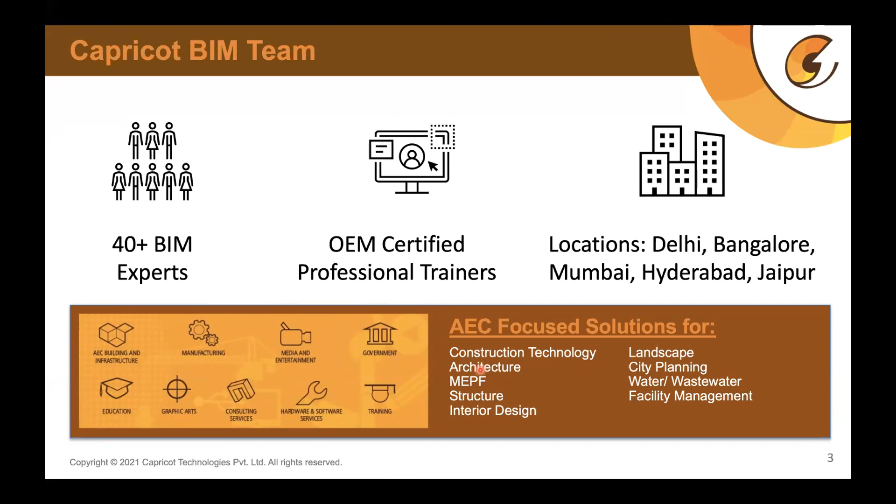Apart from our training services, we have a dedicated support team, not only towards IT support, like software support, but also around your functional and technical requirements of your software. So anytime you are stuck with using any Autodesk software or other software, you can contact us through various modes: phone, web support, live chat, or drop in an email anytime, and we would be there to support you.

Moving more specific to the BIM enablement programs that we are doing for professionals and organizations like yourself. So first, why are our programs different from others? We have been doing training programs, you can say, for the last 30 years now.

And we have realized that at the core of all these programs lies people, people like yourself. Even in an organization, it's the people who are actually doing work on these tools or these platforms. So in our program, what we have done is put people first at the core of the program.

So if he is an architect, the program is specifically designed around that person; or the designer, the program is more around that. If the person is a civil engineer, he will be trained more according to his profile. Then a construction person might be having different requirements, etc.

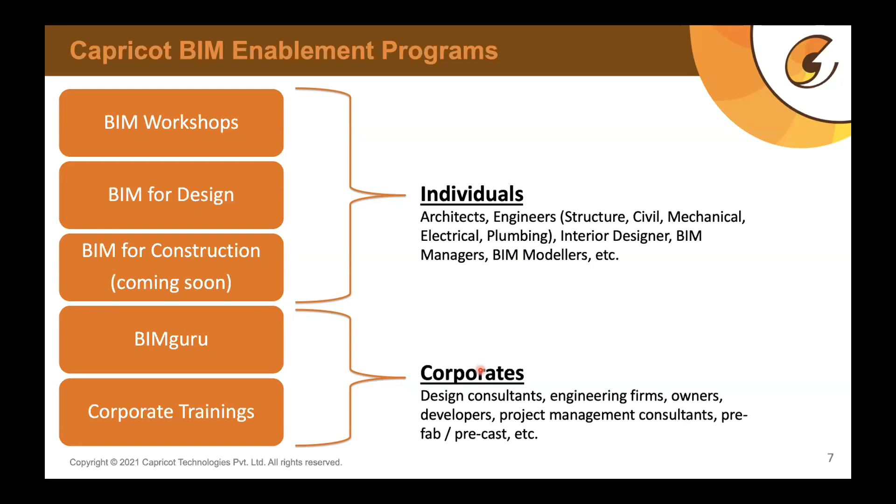First, coming to BIM workshops, like the one you are attending today. These are very limited time, like 2 to 4 hour programs, highly focused on 1 or 2 topics to address current market requirements. We keep researching what is happening in the market, what people are looking for, and run these highly specialized topic-level programs. This serves two purposes: one, it enables you to gauge the capabilities of that solution the workshop is on; and second, it at least starts you on a path so you can start using that software if you already have it, and utilize it much better.

The second one, which is our main program for individuals, is BIM for design. This is an extended program that we run for 120 hours. Depending on whether it's a weekend or weekday batch, it can last from 8 to 12 weeks. This BIM for design program is completely aligned with an engineer's or architect's or BIM modeler's or BIM manager's work role, and we follow the workflow of what they do in a normal project or day-to-day life. All the tools are aligned to the steps.

So we are not doing a tool-based training over here - we are very clear about that. We are not only teaching you how Revit works or how Navisworks works or any other function works. It's more about, if you need a certain output, what are the steps involved to do that? So tomorrow, after completing this BIM for design course, you can go to any organization in the world and say, I can do it. You don't have to say you'll think about it or try it out - you can just say, yes, this is the output required and I can deliver on that.

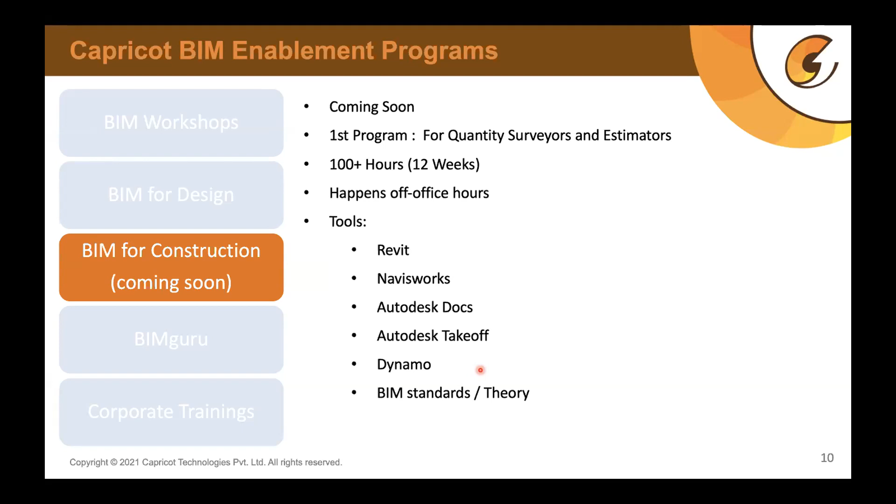So the three individual programs that we run are BIM workshops, BIM for design, and BIM for construction. Next, more oriented towards corporates, is BIMguru.

This is a program that we run on an annual subscription with organizations, where the focus is primarily on how we increase technology adoption in your organization. We develop the talent, which could also mean hiring the right talent, and help you in that. Secondly, how do we upskill your current level of BIM usage in your organization. And of course, we support you in resolving your IT issues and issues related to BIM. This is an annual subscription kind of program.

As a part of this, we also give you a lot of content. It can be Revit families, Revit content. And especially in India, you have a lot of India-specific templates required for different domains. Engineering might have different templates required to use a software, architects might have different requirements. So for that we have different templates. We give you a lot of content as a part of this program to your organization, so that will make your usage of software very fast.

And of course, we run a lot of corporate trainings. We do a lot of customized trainings for our customers, and these customers are not restricted by size or the type of projects they do. But when they have a vision that they want to move to a BIM platform and do their projects on BIM, that is where we come in and help them on strategy and planning of how BIM will be implemented in their organization. How do you optimize people, how do you optimize the right technology, which skill set is required to deliver these projects in the right manner. So we do a lot of customized trainings for these kind of organizations.

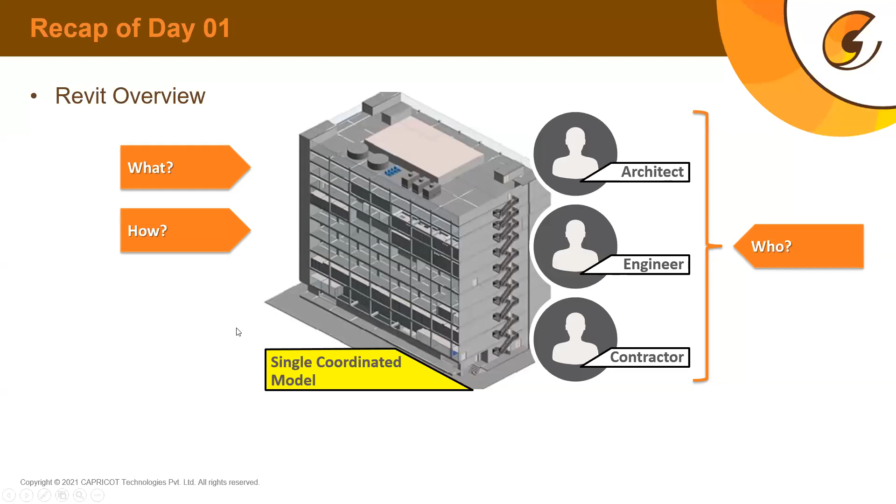When can we use this? We can use the same software from the inception of a project to the operation stage of that project. Then we discussed Revit advantages yesterday - there are a few more advantages we already know, that it creates a single coordinated model, and the model is in respect of a project, but for the software, it's a database.

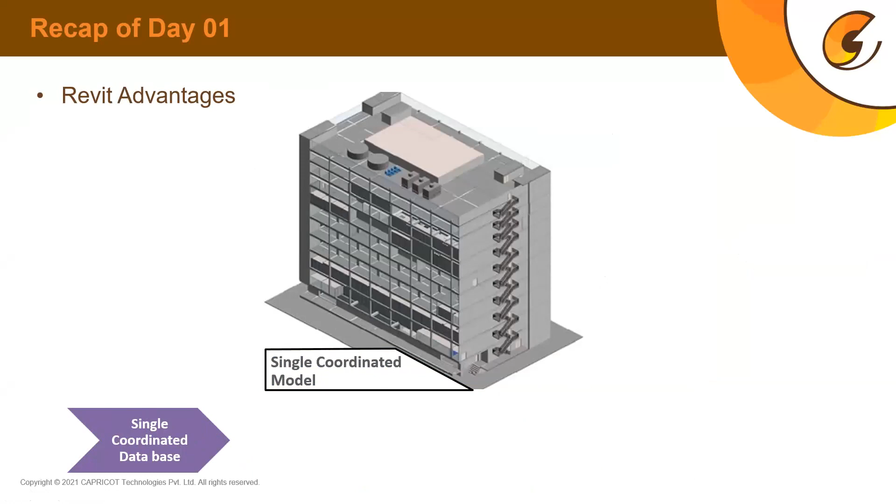So we have a single coordinated database in this case, and we can collect all databases together, like what we got from different consultants or stakeholders, and run different clashes on it. After coordination, when clashes are identified, we can assign those clashes to a particular domain person, and changes will be made automatically. So whatever changes are made in the central model will be updated throughout the domain. Change management is automated in this case.

Then it automatically updates, like we already discussed, 3D and 2D connected views. So the documentation process is actually enhanced in this case. You need not manually update every drawing, section, plan or elevation separately. You just need to focus on design, and the related views will automatically update. In this way, it enhances your 3D views output and 2D documentation as well.

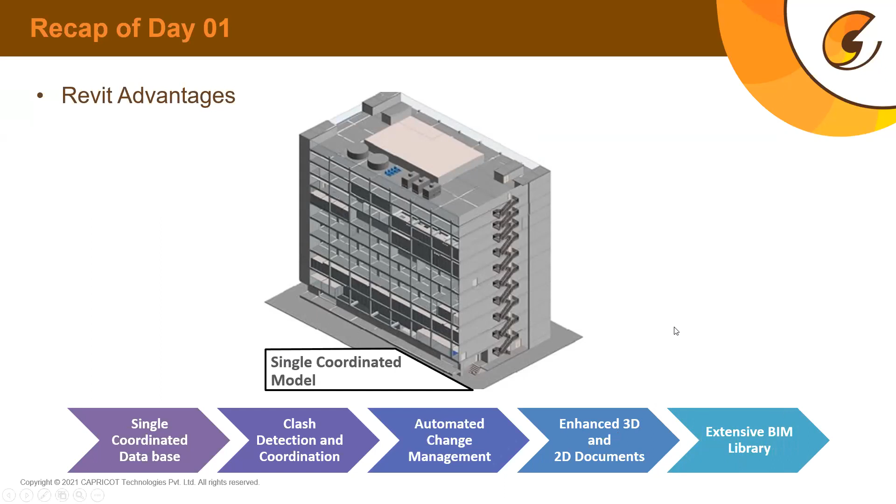But for that, we need to use especially BIM library. It has extensive support of BIM library, which we discussed a bit in detail yesterday as well. I'll just briefly go through that part again. So now we'll discuss about BIM library specifically.

In order to get accurate quantities, because this workshop is actually dependent on the quantification part of Revit, we need to also understand how Revit families work. Primarily, Revit has three types of families: loadable, system families, and in-place families.

We discussed in detail yesterday that loadable families are similar to blocks in AutoCAD, that you can save those families with all its parameters as a separate file and load it into multiple projects. But when we do multiple projects, we need to, according to the design requirement and specification of the project, create walls, floors, roofs, and staircases.

These are all customized according to the project requirement. That is why these types of families fall under system families.

Then there might be a specific requirement for a particular situation. Like yesterday, I gave an example that if I have a column and I need to wrap a table around that column, and then, for example, the column size changes, then the table wrapped around the column will automatically get updated, will get affected in that case. So here we are actually creating a relation between two families. In that case, it's a unique situation, and situations like these can be handled by using in-place families that we discussed yesterday.

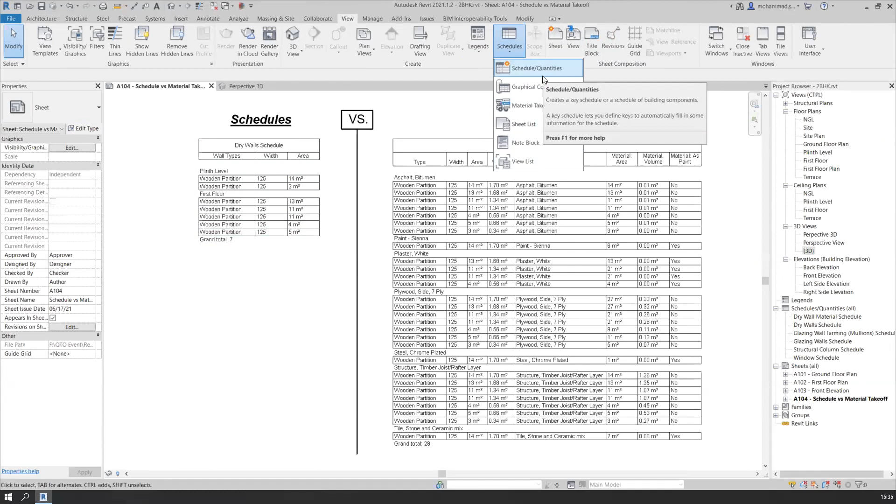For example, I want to count how many wooden partitions are used in my project, then it gives me 7 wooden partitions. But in this schedule and quantities option, I cannot get information about the sub-component of that family. For example, if I need the material specification of each layer applied in a wooden partition or any family, I need to use material takeoff.

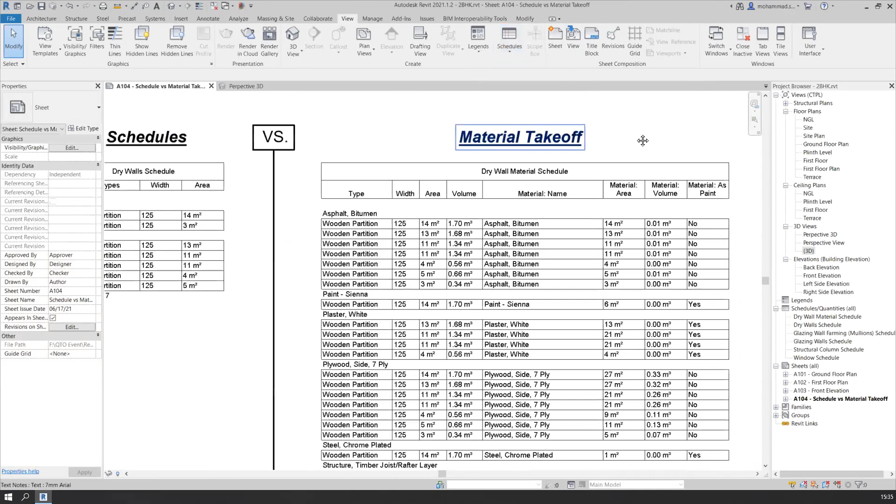We did that yesterday, so this is actually the comparison between schedules and material takeoff. As you can notice, for 7 families, I have used 28 materials. So in this schedule on the right side, it's about the same drywall family we discussed yesterday, and we are getting 28 entries here.

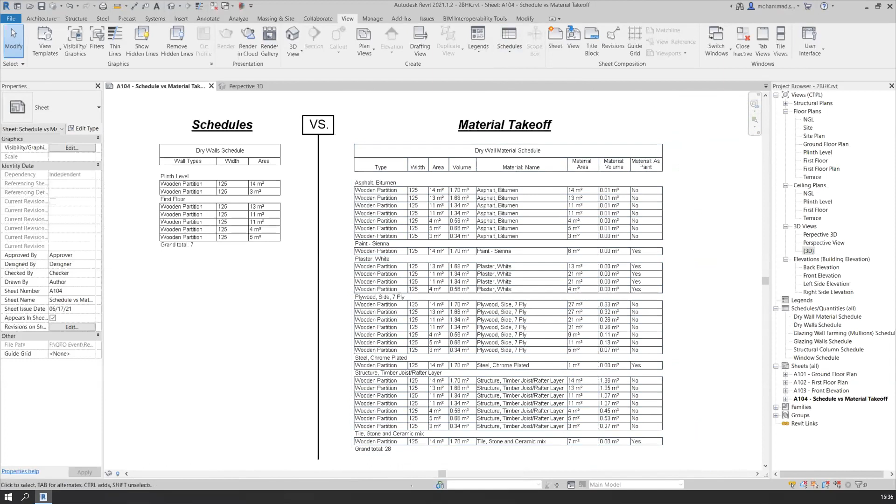At this point we actually wrapped up yesterday's session. We also discussed sorting and grouping, how we can group our families on the basis of, in this case, floors, and in this case, on the basis of material. We also discussed if we can filter out other components which we do not want to see in our schedule, on the basis of certain properties.

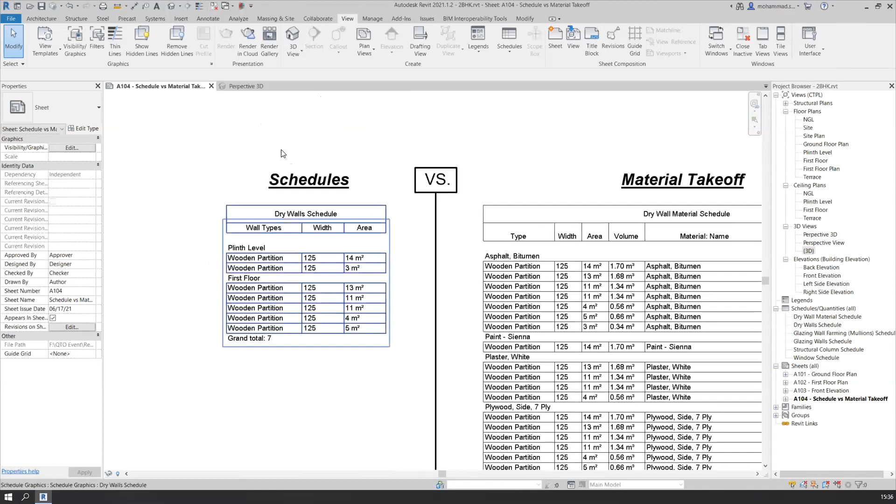So this was the project we worked on yesterday, and it's an ongoing project. It's a residential type project. Today I'll quickly recap the part where we create a schedule, by creating a door schedule.

So I'm going for door schedule by going to schedule and quantities, because I need to count the number of doors. I do not want to get all specifications like volume or area of the door, I just want to count the number of doors, the number of components in this case. So I'm going for schedule and quantities.

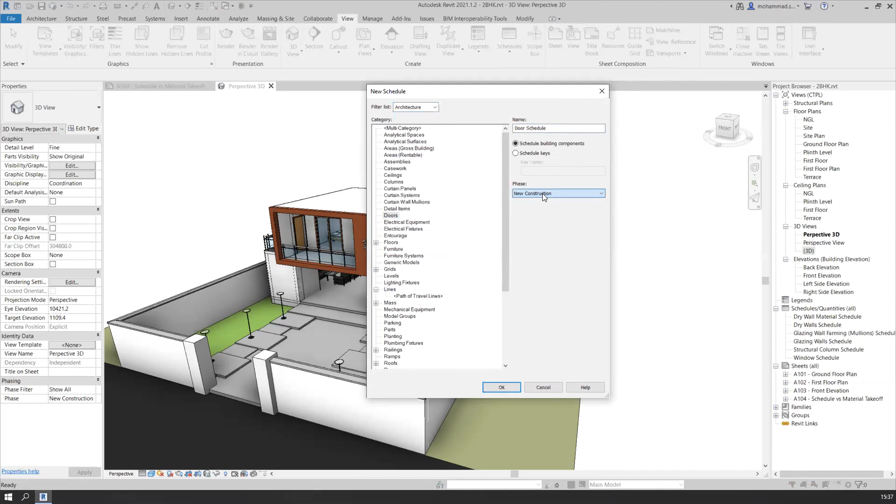I'm opening the door schedule in this case, and we got properties related to doors only, for example the type of door I want to use. So maybe I'll start with type mark, since each door is provided with a mark. Then I'll show you that in the drawing as well. Then we'll take family of the door, then width of the door and height of the door, these specifications.

After that, I'll today also add cost of the door. Yesterday we didn't discuss cost; today we'll also discuss how cost can be incorporated in our schedule. I'll open it, and this would be a preliminary cost only pertaining to material or the component. For including machine and man cost, we need to additionally add parameters. I'll also discuss that.

In this case, as you can notice, doors have marks, like D1, D2 — I'll scroll and zoom in. By these marks, I can identify these doors in my drawing as well.

Yesterday I also showed you the drawings. For example, on my ground floor, I have this drawing, and in it I have doors. This one is D1, every door is marked. Similarly this window is W2, D2 is this toilet door, and this other toilet door is also given D2. So these are marks which are already applied to these door families.

Based on that, we have got this schedule, and I just want to again revise the sorting and grouping part. We go to the properties of the schedule, and go for the sorting grouping option.

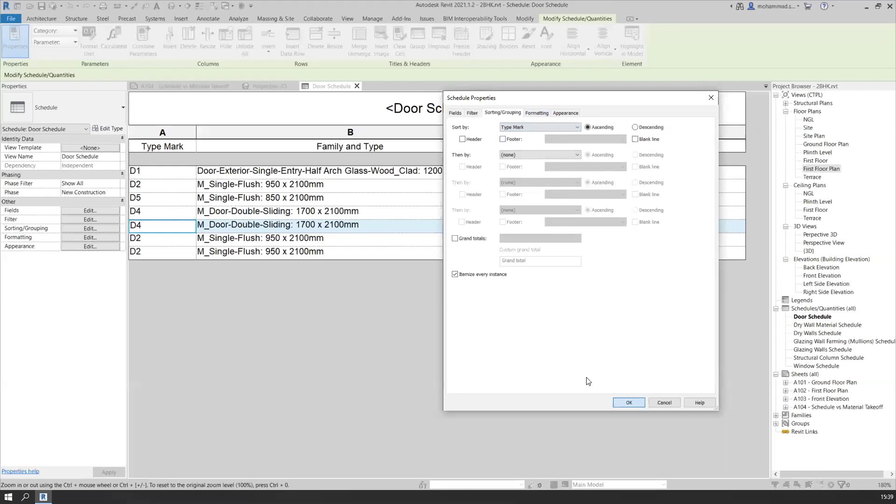And then I'll sort them by type mark. So these are now sorted according to type mark. I just also want to know on which floor these doors are placed. I can now add another field, and that is by the name level of the door.

So we can also add on which floor these doors are placed. Yesterday we also discussed this, how do we add a level. Then we want to group them, for example doors which are on ground floor as a separate group, and doors which are on first floor as a separate group. I'll again go for sorting and grouping, first I'll group them by level, and then by type mark.

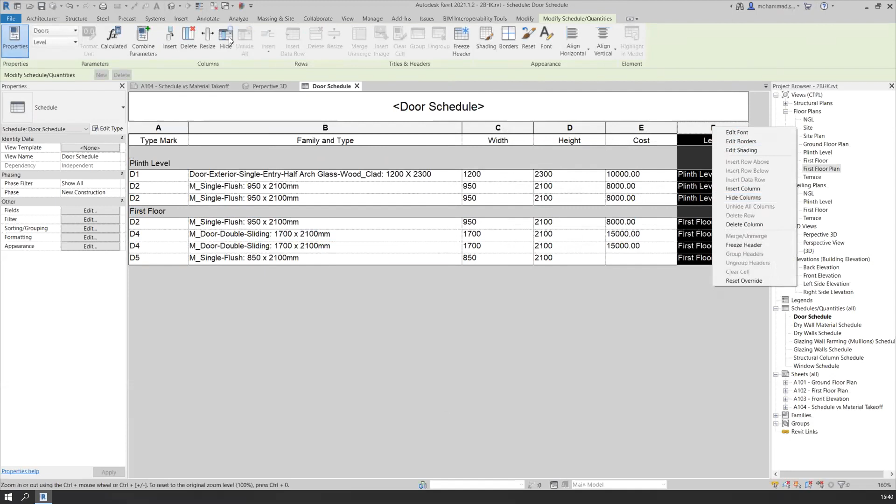And I'll also add header for level, and two groups I've got here. I think I do not require this level anymore, so I'll just simply hide this column. So we have option for hide here and under our modify tab as well. This we have gone through yesterday.

Now, since I've added costs in this case, when you create a family or place a family inside a project, or any component inside a project, for example on my ground floor, if I was adding this particular door, I can go to the properties of the door to modify it. I think most of you know who uses Revit here. And we can also add cost in this case.

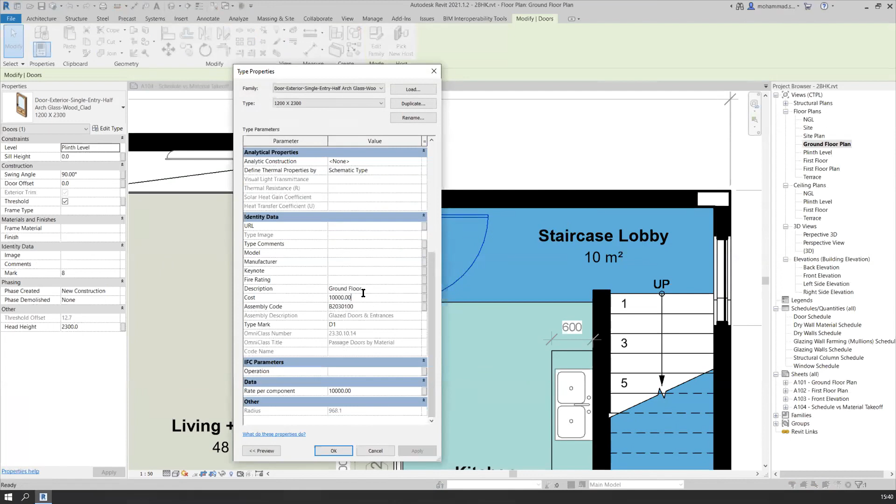So whatever cost we add here in the properties of the family will be automatically updated inside the door schedule as well, as you can notice in this case. So this last column is about cost. For this particular door, we have not added cost.

Yesterday we also discussed, if I need to identify that particular door, that particular element in our project, we can go for highlighting that element in our model. So I'll click on highlight in model, and it opens a view for us. I'll just go for another view.

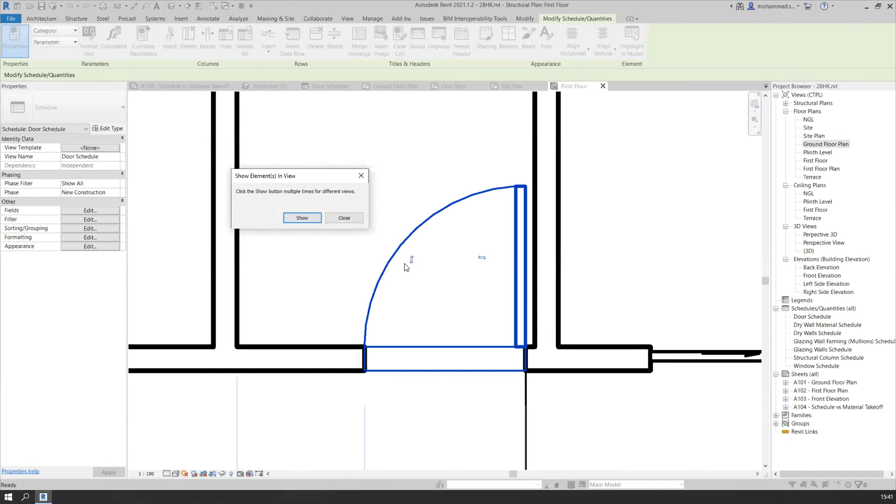This is the site plan, this is first floor. I think this first floor is good. So this door actually is having that entry D5, this door. So you can identify that this door is placed in the toilet, and can discuss with your client and other consultants, and can add cost accordingly.

So either you can add cost here in the properties, or any property you can add inside the properties of the component, or maybe you can just simply go to the schedule again and add cost there, and it will automatically update in that component's properties.

So for example, if I add 12,000 INR for this particular door, and if I get back to the first floor drawing and check the properties of this door, now this door is also updated with the same cost. Whatever cost I change here, for example 13,000 INR, or 13,750 to be very specific, it will automatically update in our schedules as well. So this is how these interrelate.

Now we'll also discuss that we can apply conditional formatting here, like we do in Excel, so that any cost which is more than 12,000 or 10,000, for example, will be highlighted in a particular color in our schedule. That is also possible, so you can add color coding to your schedule according to certain properties.

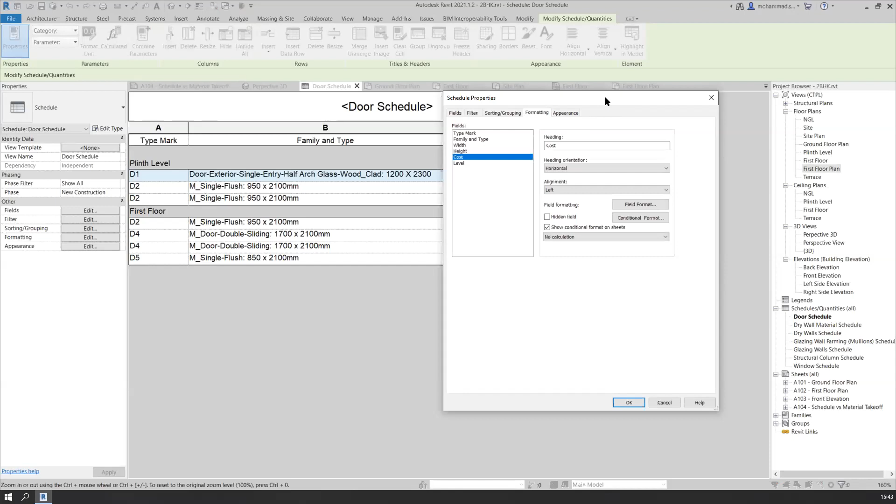For that, you need to go to the formatting option under the properties of schedule. There you select the desired field, like in my case cost, and I want to highlight by certain parameter or condition, so I can go for conditional formatting here. After clicking on conditional formatting, it opens with a set of rules, and you can also define rules. For example, you can define cost between, not between, equal to, not equal to, or greater than - these are certain rules you can apply here.

I'll go for any cost which is greater than 10,000, for example. I'll add the value here, and I'll highlight them by the color - let's say a shade of red.

And once applied, if I accept this condition, any door with a cost more than 10,000 will be automatically highlighted. So in this way, you can also add conditional formatting under the formatting option. I'm not using this conditional formatting for now, so I'll just remove it by clearing this rule from the conditional formatting option.

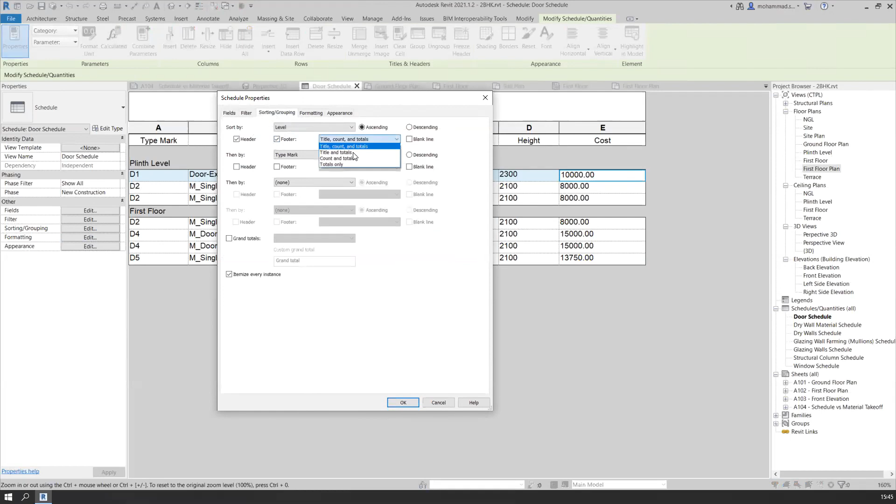Additionally, we can also take the total of this cost parameter, like we discussed yesterday. In order to get totals, you can go to the formatting option and allow cost to calculate totals. Then, after going to the grouping option, you can add a footer, and level-wise you'll get the cost. So level-wise, on the ground floor, 26,000 of cost is needed for applying these doors, and for installing doors on the first floor, I would require 51,750 rupees. You can accordingly add cost.

Additionally, we can also add a grand total for all the calculated values. That is also available under the sorting and grouping option. I'll just check grand total and click OK, and the total number of doors and the total amount of calculated cost will be given.

Later, for example, if your schedule is too large and not easily readable - in my case the schedule isn't that big since I've taken a small project for this example - but if you have a lot of items in your schedule and want to segregate by some visual reference, you can go to the appearance of this schedule.

And add a stripe row function. This function was introduced in Revit 2020. So if you are using any version lesser than Revit 2020, maybe 2019 or earlier, you won't find this option under the appearance tab. After 2020, and the version I'm using is 2021, we'll find this stripe row option.

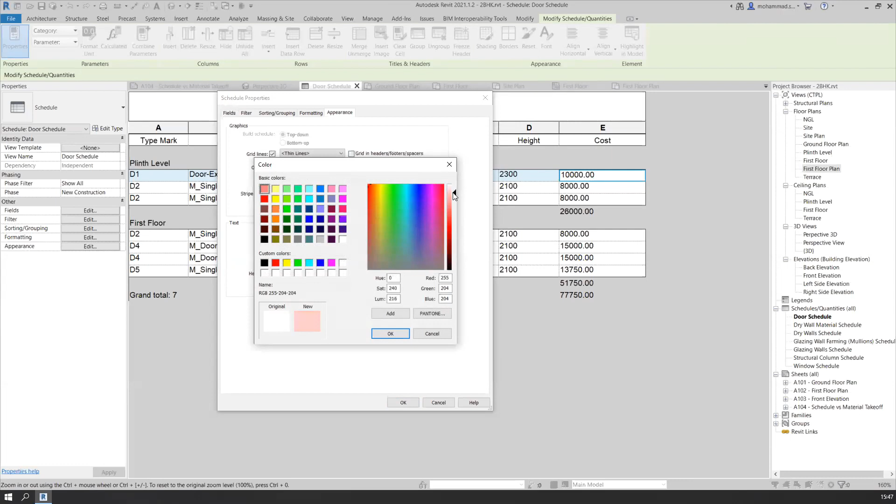Once I apply this, as you can notice, my color schedule is now color coded. Now I've got stripe rows to identify different items.

You can also add this schedule on a sheet for better presentation. For example, I have a ground floor drawing composed on this sheet, and if I want to also add a door schedule along with my drawing, we can drag and drop it onto my sheet. In my case, as you can notice, I do not have any space left on this sheet size, so I can also change the sheet size.

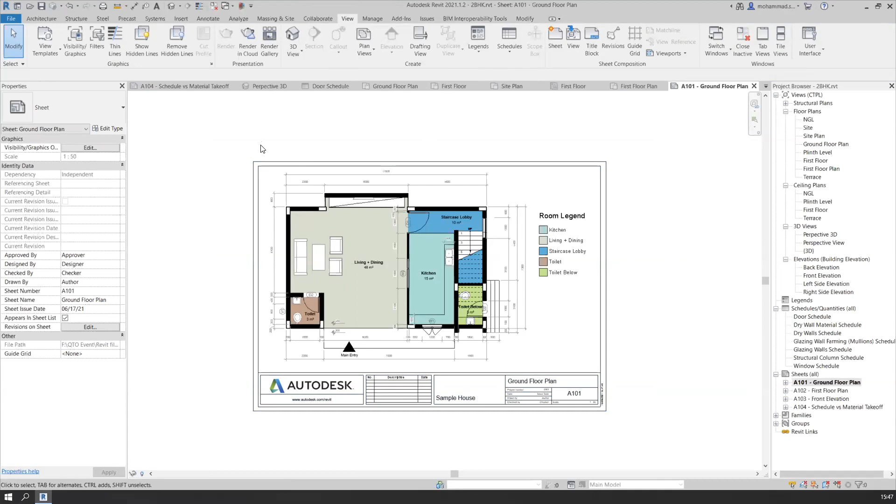Sheets can be added as a loadable family inside your project file. You just need to go to the Insert tab and load your desired title block. Autodesk comes with a bunch of title blocks too - you can go to the Autodesk library and find a folder named title blocks, with sizes ranging from A0 to A4 already available.

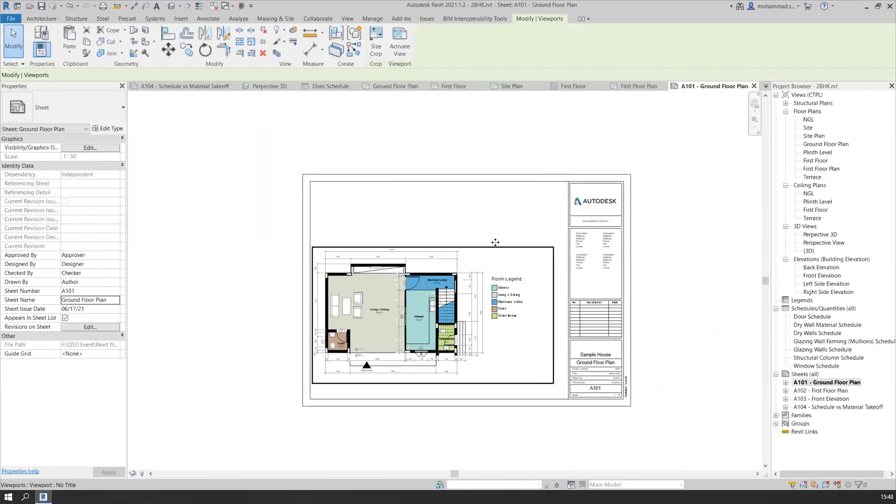In my case, suppose I would like to go with size A2. I'll just open this size, and it will be loaded into my project. I can select the title block family, or in this case sheet format, and simply change it from the properties. I'll change it to A2 size, and this will allow me more space to compose more components on my sheet.

Now, for example, if I need to add a door schedule, I can simply go to the project browser and select the desired schedule from the schedules and quantities group, and drag and drop it onto my sheet.

For example, for some reason if you do not want to see color codes on your screen, and one more thing - the width of these columns needs to be adjusted. You can do that in real time just by selecting this schedule and dragging these control arrows.

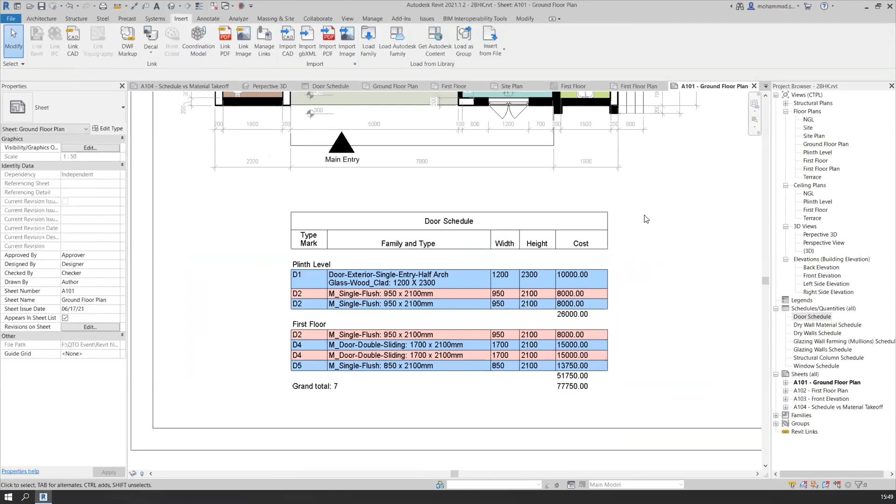Now, in my case, for example, if for some reason I do not want to show these colors on this sheet, or maybe this is a color sheet - for example, I would like to show these colors on this sheet, but for the first floor plan, this plan is actually a working drawing with black and white print, so I would not like to show colors on this particular sheet.

For that, we can again switch the size of the sheet, and drag this door schedule again onto this sheet, and go to the door schedule just by double clicking on the schedule.

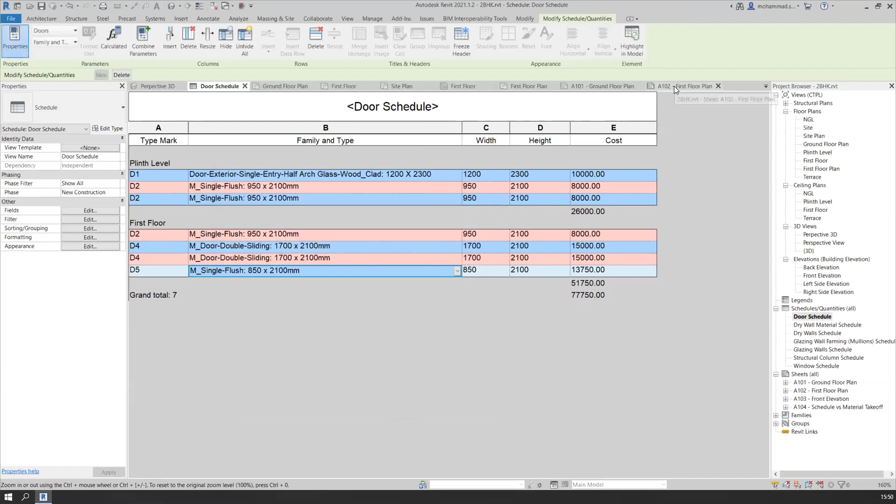I'll get back to that sheet of the first floor, and the colors on this particular sheet are removed. In this way, we can also control the appearance of our schedule.

There is more to appearance, like you can change the height of the title bar, the height of the headers, and the fonts and text. Everything you can explore under the appearance tab. For a detailed overview of these schedule properties, you can contact us separately.

For now, I'll move to another example where I can calculate cost on the basis of some formula. In this case, the cost was lump sum about the component. I can now add formulas according to the volume of a particular component, let's say a concrete wall, and get the quantity of concrete applied in a particular wall.

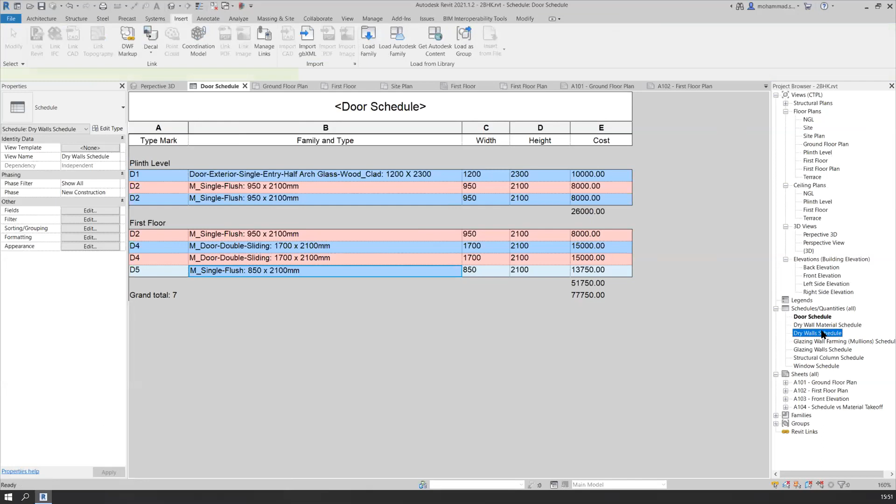For that, yesterday I created a drywall schedule, and as you can notice, I already have this schedule in this case. What I did was apply a filter, and primarily this schedule was of category wall schedule. So I went to the fields, and as you can notice, it shows the wall category. So I have a wall schedule, but it is not showing all the walls because, as you remember from yesterday's session, we applied a filter only to show drywalls.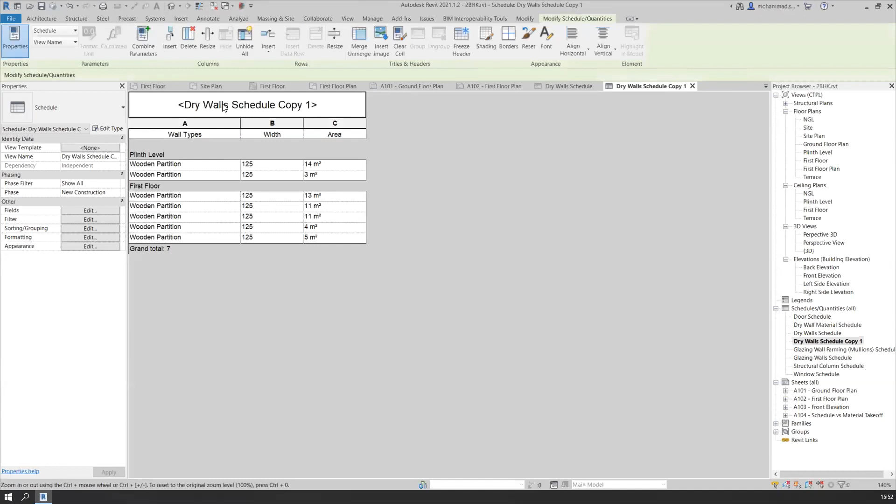What I can do is simply duplicate this schedule by right-clicking on it and creating another copy of the same schedule. In this copied schedule, I can change its name. I'll zoom in and change its name to concrete wall schedule, or maybe quantities.

And I can go to the filter option again, and instead of choosing drywall, I can change it to concrete wall. Now the concrete walls used in my project are highlighted in this schedule.

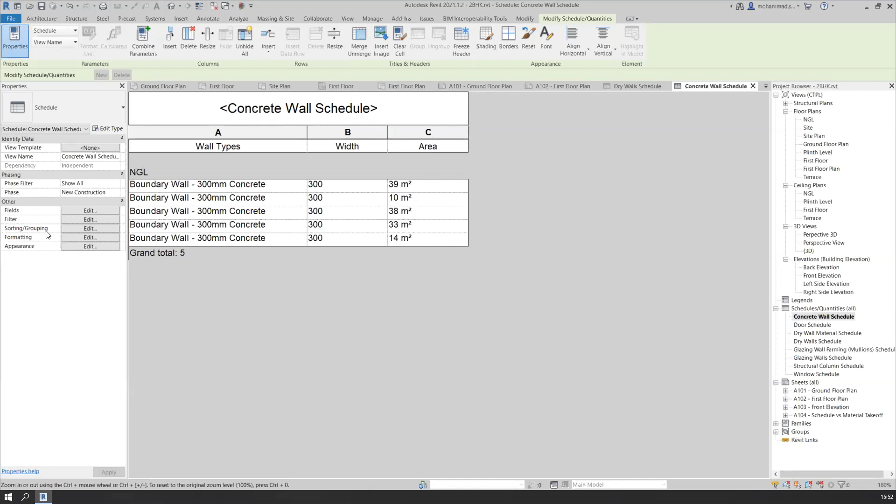Similarly, now I have an area for all the walls. I can also add volume from the list of fields. I'll go to fields again and select the volume option, loading it as a field in this case.

Okay, I've already created this. I'll just delete it and show you how to add a total cost parameter. In this case, I've added volume, and as you can notice, now volumes are also given.

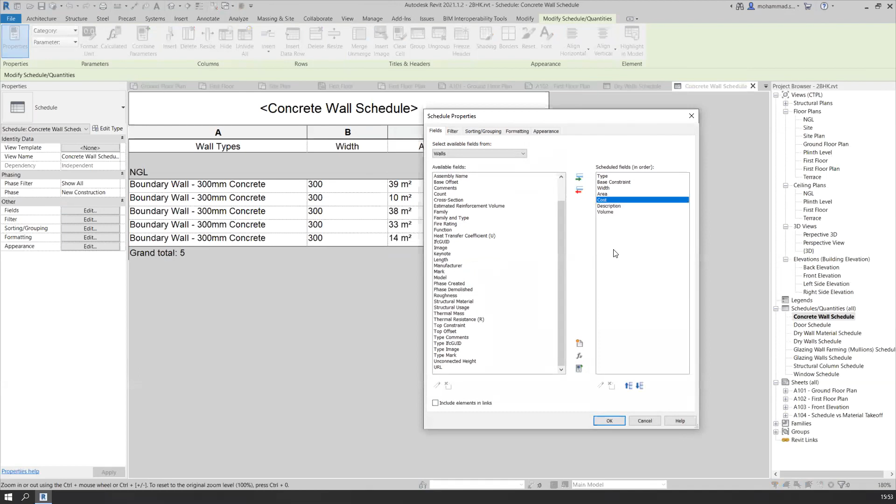Suppose these concrete walls are cast on site, and you need to calculate cost in terms of volume. Then you can go back to fields and add a cost parameter. Okay, I've already added that, but I made it hidden. So anything hidden in your schedule, you can go back to formatting, go to the cost or whichever field is hidden, and make it unhide.

And in this way, rates are already given in this case. If I go back to this particular component, for example, if I highlight this component in the model, as you can notice, this is the boundary wall. I may show it in 3D. I'll just manually go to 3D. These walls are concrete walls, for example.

If I get to its properties, I've already added the parameter for cost. This cost parameter will add only a value of cost, but this parameter by itself cannot allow you to calculate according to its volume. This is just a value you can use as a rate in this case; this is not the total cost of the wall.

So if you want to get quantities in lump sum as a cost of a component, you can use this parameter directly in your schedule, like I used in the door schedule. But for walls and for any component calculated according to area or volume, you can use this cost parameter as a rate.

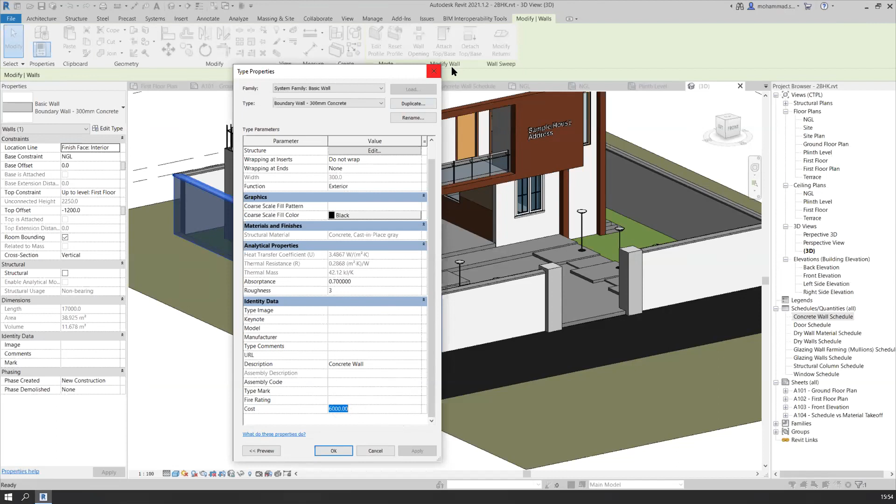That is why in my wall schedule, if I go back to the concrete wall schedule, I already have this parameter used. For example, I'll change it; the original name was cost. I can also change the header to rate per cubic meter, for example.

So primarily, this cost value is not applied to the volume. The actual name of the field, as you can notice if I go back to formatting, is actually cost. The field which appeared after area was named cost. I just renamed it as rate per cubic meter because I'm going to use it as rate per cubic meter.

Now what I can do is multiply rate by volume, and I'll get the total cost of this construction of this wall. In this case, I'm only calculating material cost. If you need to also add man cost or machine cost, you need to create custom parameters, since that is not available by default in Revit.

So you can go back to fields, and I'm just pushing this cost parameter to last, and that is actually rate. This proves that this rate parameter, which I just renamed, is actually the cost parameter available inside the properties of a family. I'll get back to fields again.

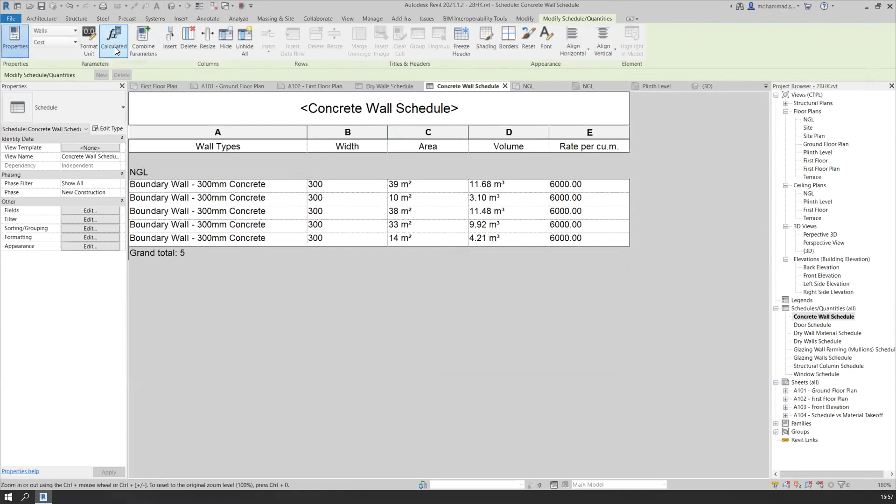So either you find this option here, or you go back to fields and create a calculated field. I'll click on the FX button, which opens calculated fields, and I can name this field, for example, total cost, or maybe total material cost in this case.

Then I can add a formula or percentage also. In this case, I do not require to add percentage, but if you require to add percentage for a particular field, you can choose that field, and the percentage according to your parameter will be automatically added.

In this case, I'm going by the formula. By choosing formula, you need to also choose the correct discipline. Like in this case, this formula is going to be used for calculating cost, and cost is not a discipline-specific component.

If, for example, you are creating a calculated value for energy analysis, you go to that particular domain and you'll find a specific type of parameter there. Similarly, if you are calculating some other kind of property, you can go for a discipline-specific property as well. But in my case, I'm going to calculate cost, which is shared within all the disciplines, which is why I'm choosing it as a common discipline.

And here, under the types of parameter, you need to also choose the type of output you want. In my case, I want output in the form of currency. If you want output in the form of number, integer, area, speed, or time, you have all those possibilities available. In my case, I'm going by currency.

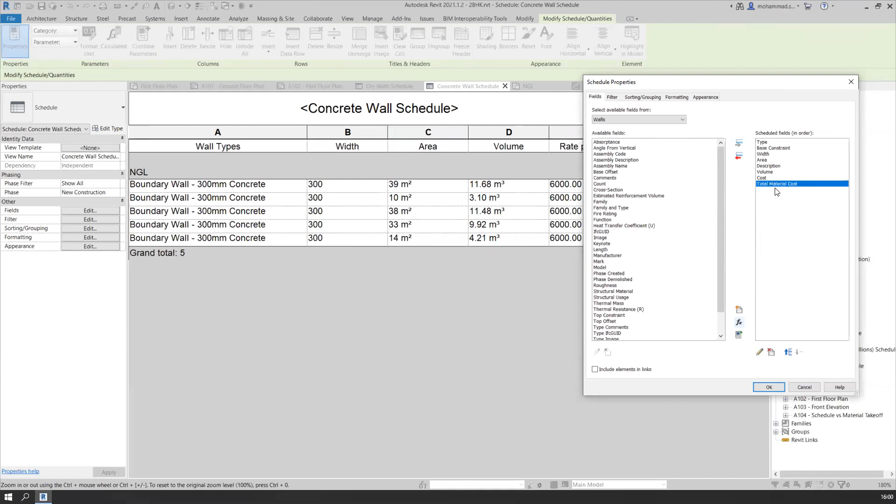So it's a small mathematical trick which can be used to cancel out those values which you do not want to see in your final output. I'll now accept it, and this will be easily accepted by Revit as well. Revit is smart enough to identify the output units, and accordingly you need to take care of those units. Now I'll accept it, and as you can notice, total cost is automatically updated in this case.

Now, for example, if I open a side-by-side view, this perspective view, or maybe a normal 3D view. In this case, I'll just open a side-by-side view. And as you can notice, if I change the height of the wall, the cost will automatically get affected.

So you should keep an eye on the volume and the cost parameter in my schedule. For example, if there is a revision in design, that these boundary walls should not go up to... okay, I'll keep it unconnected. These are actually going up to 2100, that is 7 feet. Now it is decided that these should not go up to 2100 mm, it should only remain up to 1500 mm. I'm changing its height, and if I apply it, as you can notice, volumes and total cost are automatically updated.

So in Revit, you need not manually update 2D views or schedule quantities. These will automatically get extracted from your 3D model. So what you need to do is focus only on your model, on your design, and the rest will be taken care of on its own. And I'll just change it back to 2100, which was the decided height for this particular boundary wall.

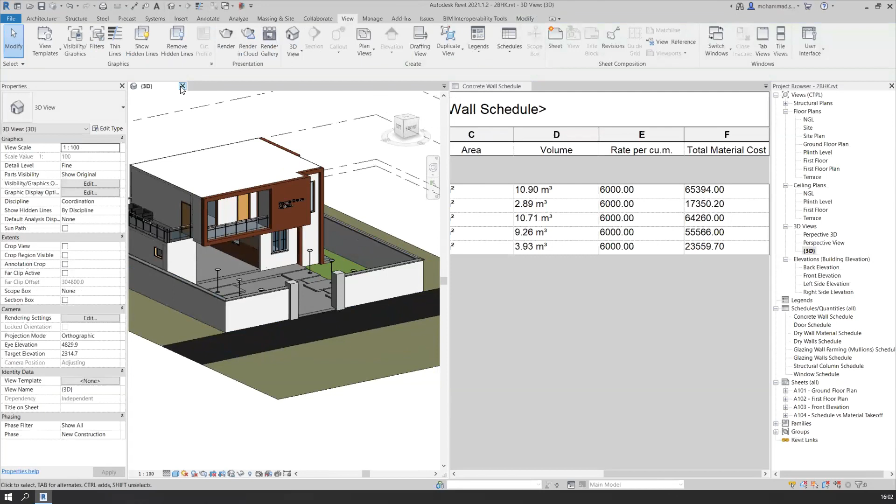Now, similarly, we can simply add totals for this cost just by going to the sorting grouping option. The grand total is open. I just go for formatting, and for total material cost, I'll just allow calculating the totals. So in this way, you can create a bill of quantities also by collecting all these schedules on a sheet. Like I've already told you, we can create a sheet and drag these schedules, and then you can make it more interactive.

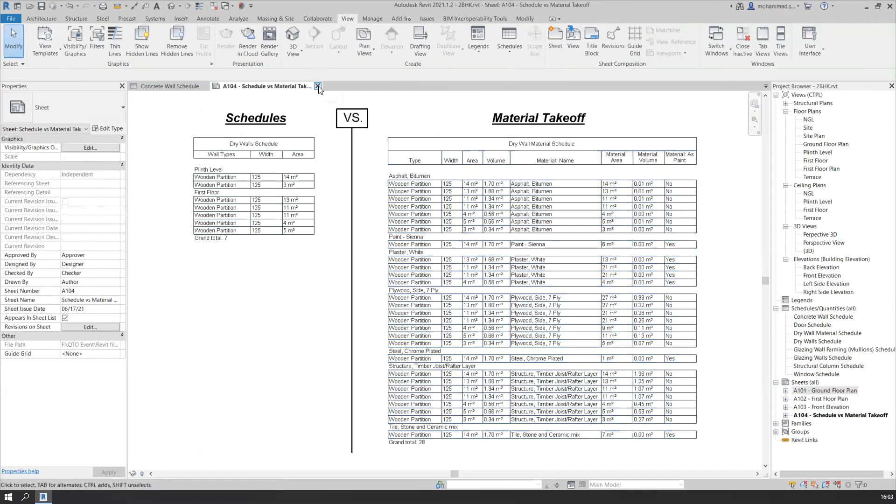So now, because time is also limited, I won't discuss further — there's a lot to discuss in a schedule, many tricks which can be discussed in this case. I've only covered the basic overview. If you want detailed training on this topic, you can connect with us. We've already shared our contact details, and we'll also share details at the end of the session.

Now I'll discuss exporting all these schedules into an Excel file for creation of a detailed BOQ — let's say, if a person you hired for quantities is not working on Revit and wants to work on Excel, then you can also export these quantities into Excel.

For exporting into Excel, you go to the File menu. Under the File menu, you have an Export option. If you scroll a bit down, you'll find an option called Reports. From this option you can export schedules, but before that you need to actually open that schedule view.

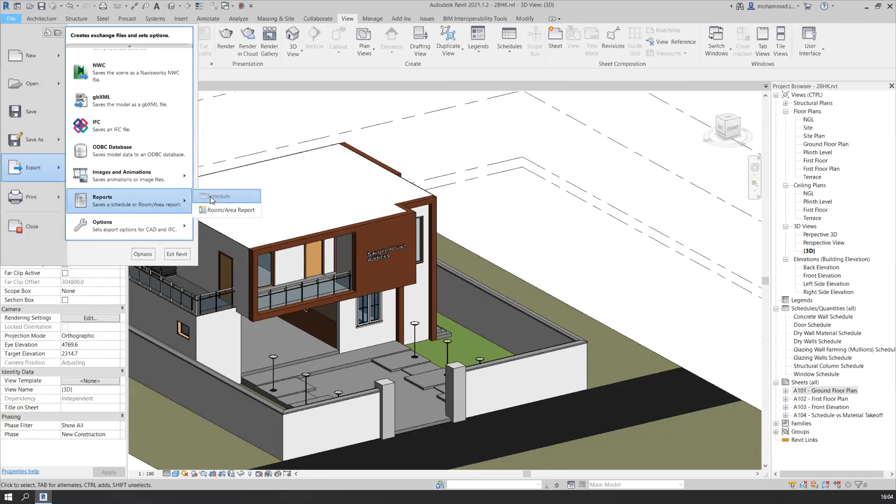In my case, I want to export this concrete wall schedule which I just created, and also the door schedule. Now what I'll do is go for each schedule one by one in a particular view, and then access this option under the File menu to export that schedule.

Under the Reports option, you go for the Schedules option, and this will ask you to save that file in TXT format. Like I said, we can export into Excel, but up to Revit 2021 version, we do not have direct support for exporting into Excel. If you want direct support for exporting your schedules into Excel, you can either use Dynamo or convert this TXT file into an Excel file as well.

So for example, if I do not have knowledge of Dynamo, I can also open this TXT file into Excel because it's a delimited TXT file. For that, I'll just choose a location. For now, I'm saving it on the desktop, and I'll call it concrete wall schedule. I'll save it — or maybe I'll go to documents because I have fewer files here. I'll just save it here.

And the next option asks me to delimit my data. In order to delimit your data, you need to either use the comma delimited option, space delimited option, or tab delimited option.

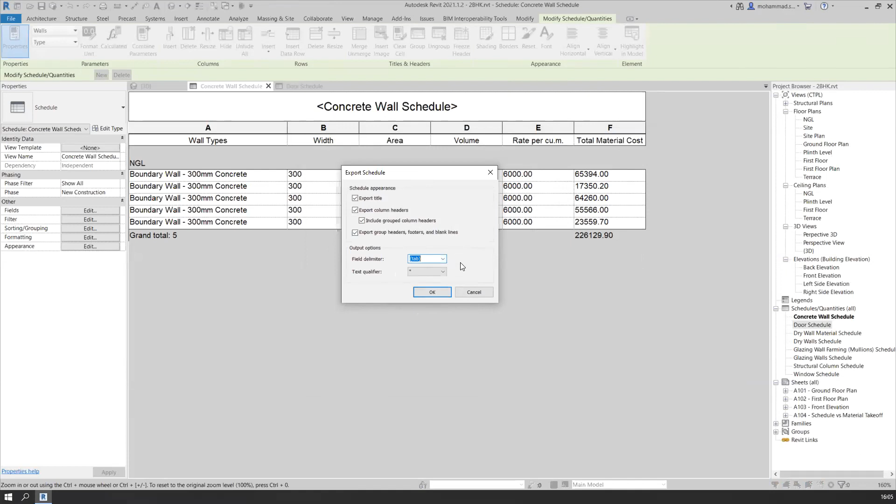Those who have worked with point files might already have this knowledge. I'm just accepting the default option, and then I'll open the folder where I saved this.

I've opened my folder, going to the documents, and as you can notice, a TXT file is present. I'll open this TXT file, and as you can notice, the delimitation is used as inverted commas. This is not in the form of Excel.

In order to open it in Excel, I need to access Excel. I open the Excel file, and then we can simply open this in Excel. I've used the drag and drop technique - in Excel, okay, not drag and drop technique, this will not work. I need to get to the open workbook option.

I go to Excel in this case, and I'll go for open workbooks. I'll go to the location where it is saved on my computer and change the file type - in this case the file type is TXT file. So we need to switch to TXT file type and then select the desired TXT file.

Before opening into Excel, Excel will ask you about the character used as a delimitation. In this case, I've used delimited data. I'm going for the desired delimited option, which was tab in my case, and then I'll just accept it.

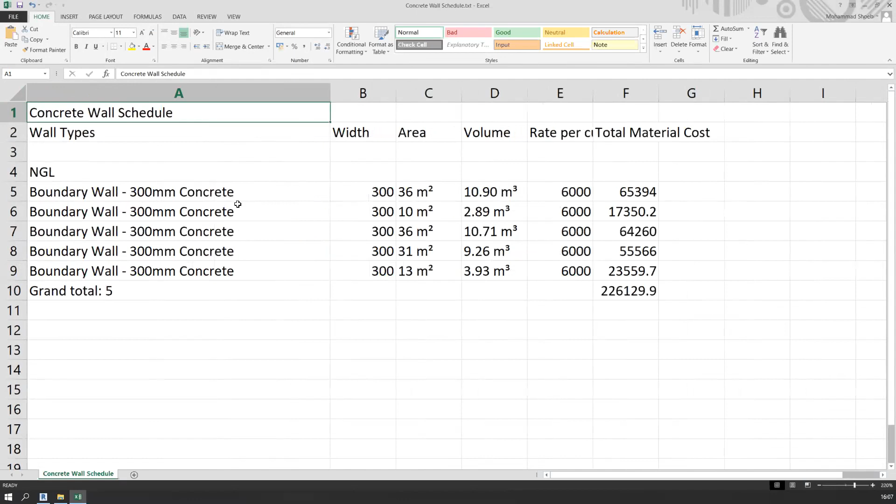Now, as you can notice, this schedule is opened in Excel. I'll just zoom in for a better view. So this is the same schedule, but this is not a smart schedule - these are just a bunch of values.

I've created a grand total here, which is a total of these values. So if I make any manual changes in these values, for example, this will not update. So the point is, it's not a smart export option, but nevertheless, this is an option - a default option which is available inside Revit to export data into Excel.

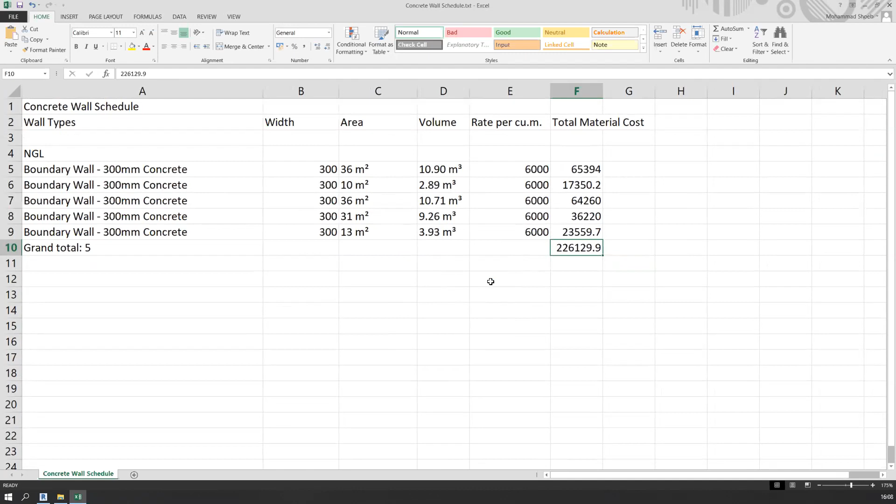Once you export it into a TXT file and then open it into Excel, you need to also save it as an Excel file. Otherwise, it will be updated as a TXT file itself. As you can notice in the title of this file, this is still read as a TXT file. I need to save it and convert it from a TXT file to an Excel workbook, and then only can you save it as an Excel file.

Now I'll get back to the folder where I saved this file, and as you can notice, now it is saved as an Excel file. So up to Revit 2021, I have not explored 2022 much, although now Revit 2022 is also launched, but up to Revit 2021 there was no direct support for exporting into Excel. For that, you can use alternate options.

For example, you can use Dynamo. So if you have computational design knowledge, or if you are into coding, these type of scripts are also available online, so you can use these scripts or the Dynamo tool for exporting data into Excel. Dynamo can also work as an API - it's a tool that allows you visual programming. If you need to know more about visual programming and computational design, you can contact us separately. Because of the time limitation, I'll just show you the workflow.

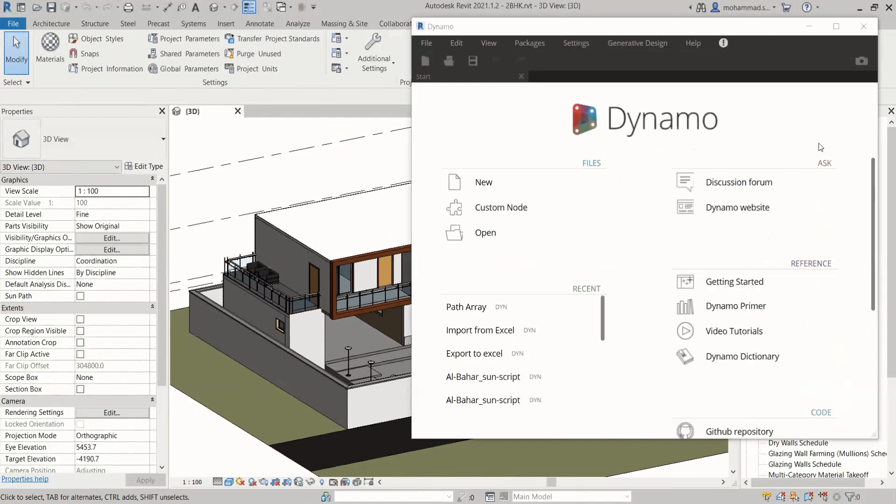This is the same project. I'll open Dynamo in this case, which is available under the Manage tab. It opens as a separate window. Then you open your script - in my case, I've already created a script.

In this script, you can define the types of component which you want to export. In my case, I'm taking an example of exporting a wall schedule. You can take any type of component available in Revit - it will automatically detect that. Then you can simply run it, and as you can notice, this data is exported into Excel.

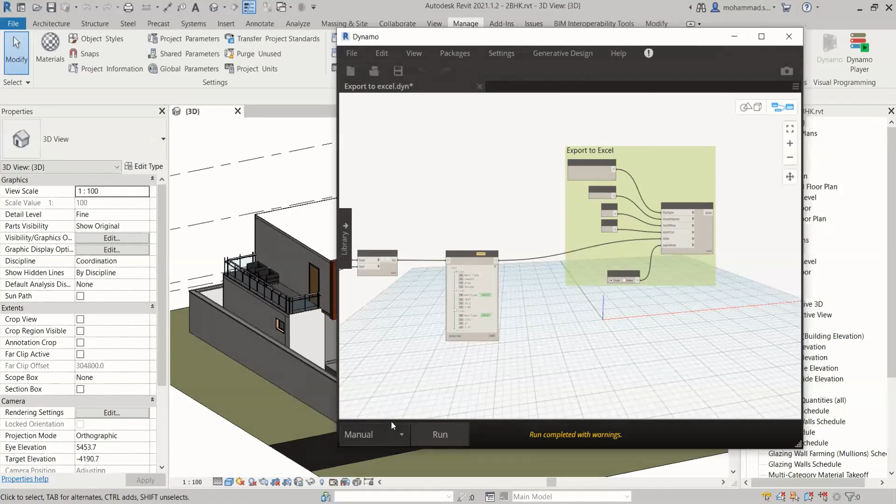And it has created a live link. My Dynamo is running in background, and if I make any changes in the schedule, that will automatically update in our project model. Like for example, if I create new walls here.

There are 77 entries, like I showed earlier. As you can notice in the Excel file, there are 77 entries up to 77 rows, and the data is filled. For example, now if I add more walls.

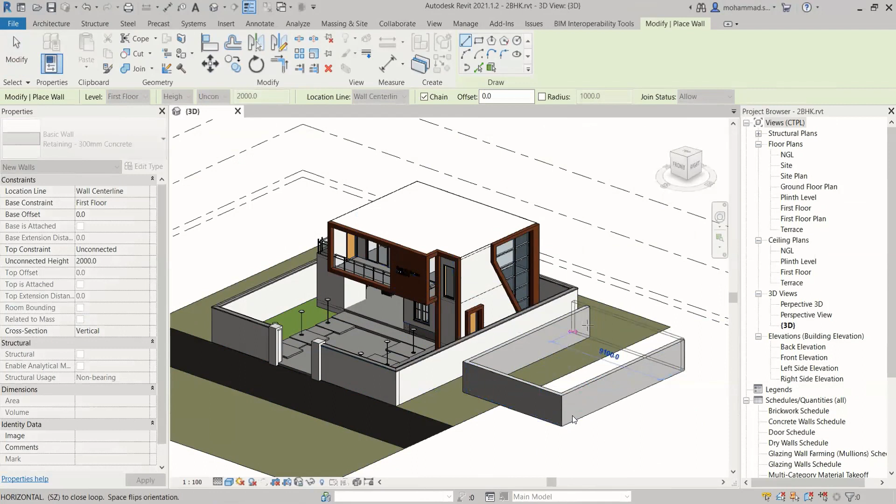I've added a retaining wall category, retaining wall family in this case. Now if I get back to the retaining wall family, and back to schedules, as you can notice, now the entries are updated in the Excel file as well.

If I go side-by-side view, just to clarify more, and delete these walls again, Excel will automatically update. Now the entries are up to 80 rows. If I delete all the walls, the entries will automatically update up to 77 walls.

So by using Dynamo, you can create a live link between Revit and Excel, and whatever changes you make in Revit will automatically update in Excel as well.

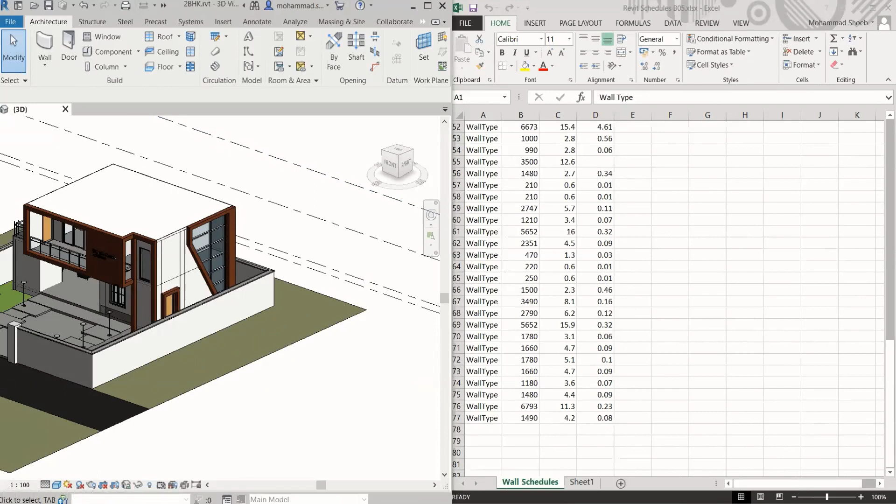Similarly, if this Excel file is given to a client or contractor, and they add a few comments in it - for example, your project is still in discussion, in my case this project is live and still in discussion - and suppose I send this data to someone not using Revit, they can also add comments in it, and those comments will automatically update in the Revit project as well.

So another workflow is about exporting data back from Excel to Revit by using Dynamo. So I have this file, I'll just add comments to it.

For example, any comment like add more windows, just a random comment which came to my mind. Then maybe change plaster types.

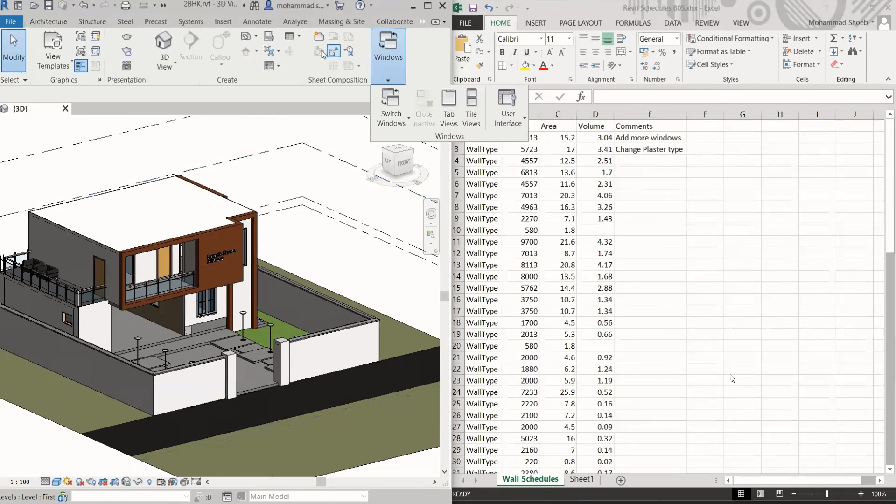Then if I get back to Revit and create a wall schedule in this case as well, to collect all the comments in one place, I'll take wall schedule, add family of walls, family and type parameter, not fire rating, and then I'll get to comments. Only this much I'm adding to my schedule.

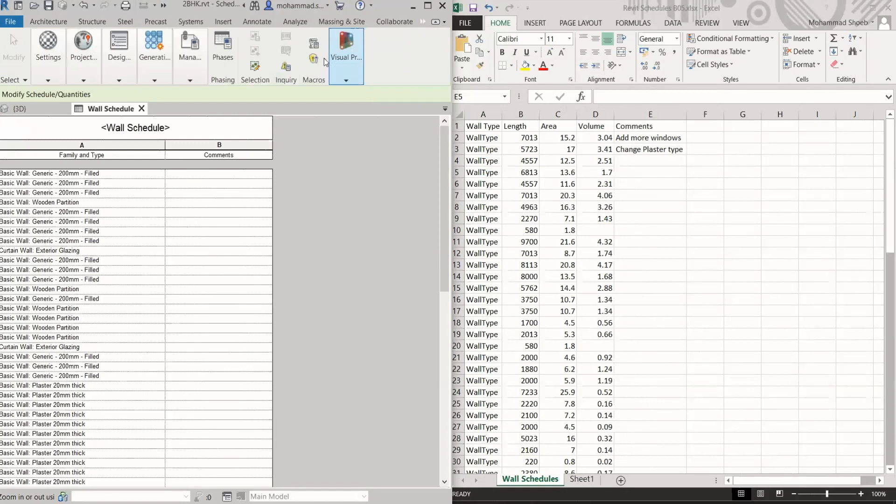And if I run Dynamo now, I'll get to the Manage tab - since it's a compressed view, I need to switch to the Manage tab. I'll open Dynamo again, and I have already created a script for importing from Excel again. This is a very simple script, and I'll run it.

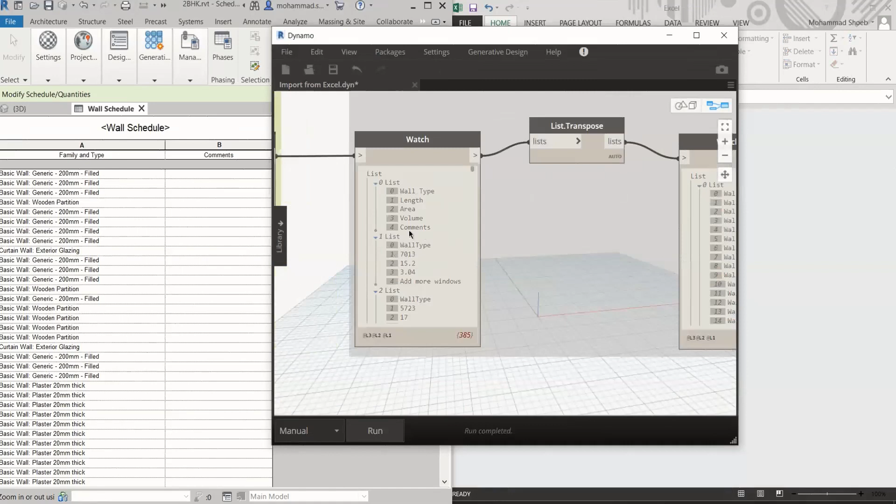Yeah, I'll freeze it first. I'll just check the data because sometimes data is not... yeah, comments is actually updated in this case. These are all the data collected from the Excel file. I need to get the comments data, that is the 4th column. I'll just add that column here and run it again. Yes, comments are added because I've added only 2 comments, rest are null.

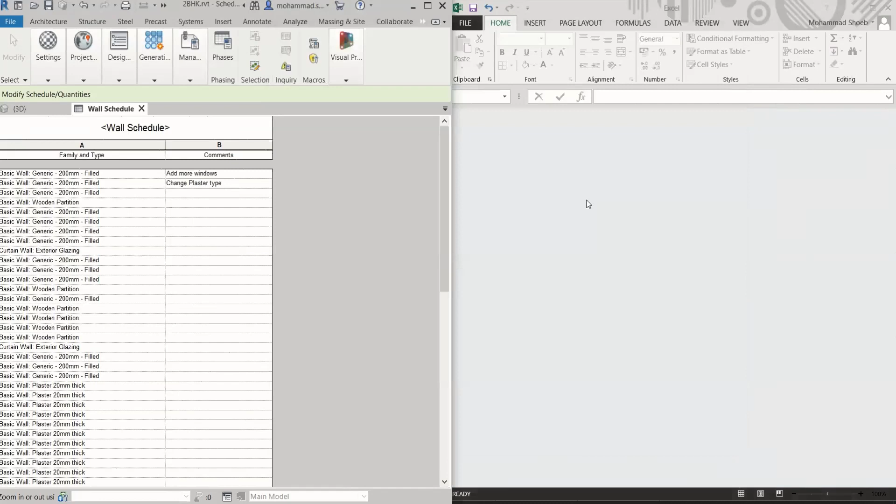Now I can unfreeze this node, which exports back to Revit. So as you can notice in my Excel file, in my Revit file, these comments are updated. The Excel file is updating also.

You actually require good RAM support for this process. Then, for example, if I keep on adding this information in the Excel file - example, change finishes - and simply save this, that will automatically update in Revit as well. So it's a live link back to Revit from Excel.

Then, for example, if I add more comments here - suppose this wall is a curtain wall because it doesn't have any volume - and if I add, for example, check SHGC value for glass, and I'll copy this to some other places randomly, and save it. As you can notice, these are updated in Revit as well.

Although Excel takes time to reload in this case, if you have good RAM support, then you can do it more faster.

So this was from my side about the model. Now if you have any questions, we can take a Q&A break, and then we'll move to another session for this workshop that is about Autodesk Takeoff.

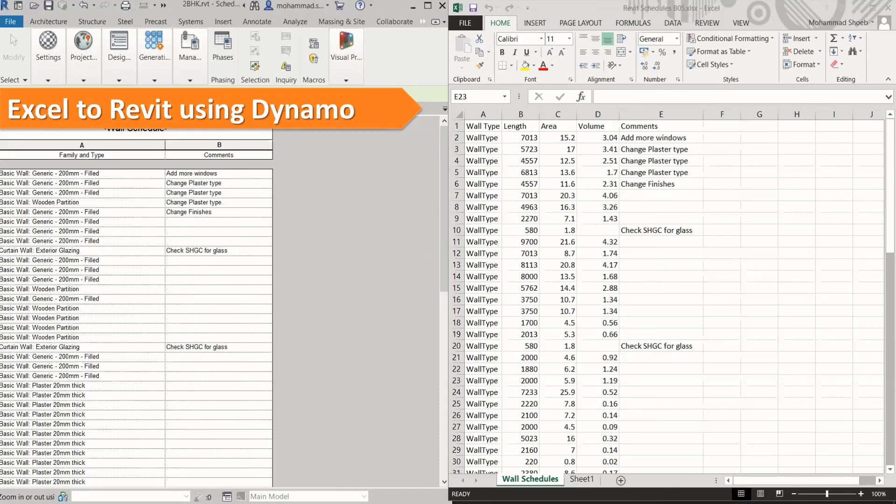Yes sir, so let's take a few questions. There are a lot of questions again today. So I'll be asking, is it fulfilling all the functions of project management software also, when we talk about Revit and Dynamo?

Yeah, with the combination of Revit and Dynamo, you can to a certain extent create workflows for project management purposes also, although there is no direct option, there are no direct parameters.

For example, for costing or adding cost, I need to create a custom parameter by creating a formula. So yes, by adding custom parameters and using Dynamo workflows, you can customize your software according to your requirements.

Although I think another session about Autodesk Takeoff is more relevant for this kind of job. For project management related tools, we'll have a more detailed discussion post this Q&A break. A lot of doubts related to field activities during construction will be cleared.

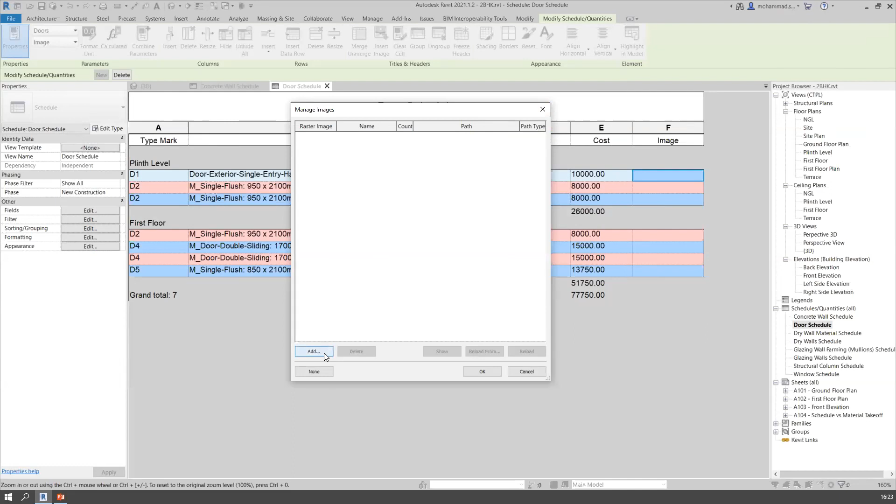In my case, I do not have an example image for now, so I'm not adding any image. Or maybe just for an example, I can add a logo of our company, just for fun, as an experiment.

For example, if I open this, Capricot's logo is added in this case. So the image will be shown with the name in the actual schedule, but once you check it on the sheet, if I get back to the ground floor sheet, this logo is updated here. So any image can be updated this way, but there's no live support; you need to save the image beforehand. I hope this answers the question.

There's another very interesting question. I think we'll take this up as the last question. The rest we can answer through mail or at the end in the Q&A session.

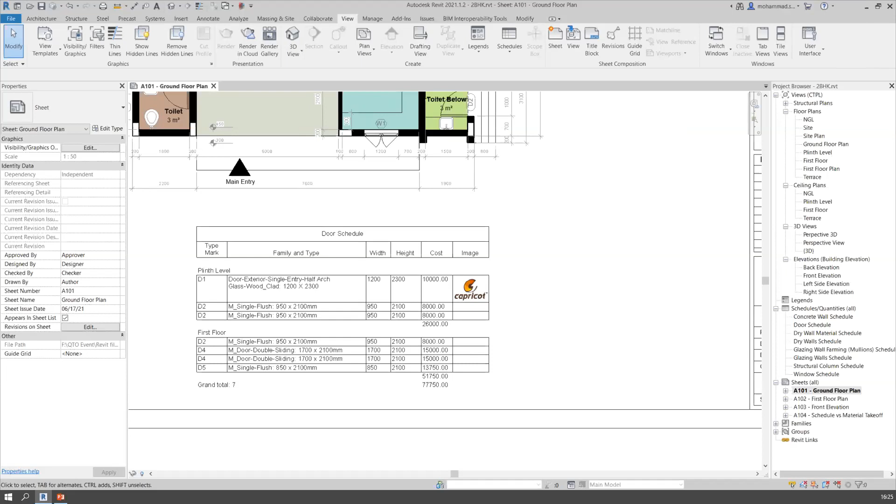When we generate the wall schedule, Revit gets the length from center to center of the wall. But what about the actual dimensions, like face to wall? Dimensioning is a very vast topic, but to answer this question, I'll show you one example. In my case, I've taken all the dimensions from the edge of the wall. While dimensioning your wall, you can use wall face or core center accordingly. By default, it is taken as the core of the walls, which is why it always takes the wall center line or core, but otherwise you can switch to the faces as well.

Sorry, the screen has just switched. In my case, I've switched to wall faces, so you can use this option.

Any other question? There are lots of questions I can see. I think we should continue with this session, and in the end if we have time, we can answer those. Otherwise, we'll answer them through mail.

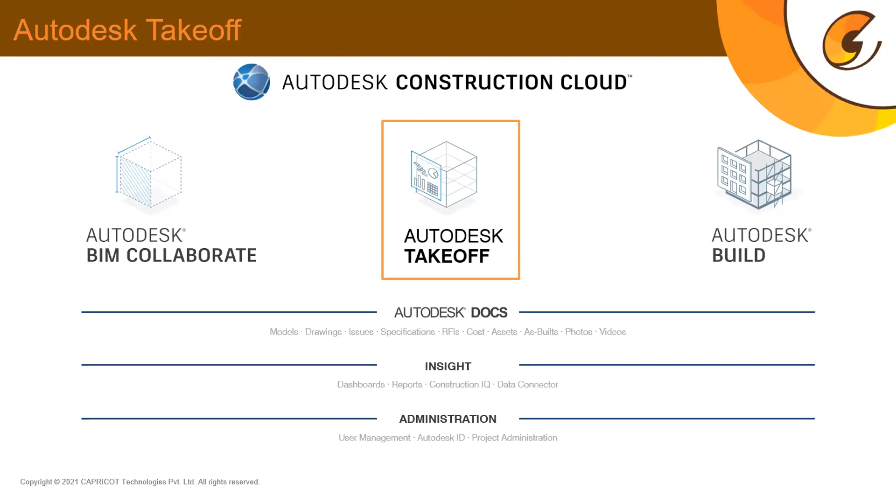As I mentioned, Autodesk Takeoff performs accurate 2D takeoffs and generates automated quantities from 3D models in a single takeoff solution. You do not have to toggle between the 3D model and the 2D sheets with calculators.

It's an integrated solution where you can manage your documents, your 2D files like plans, elevations, sections, working drawings, all those things. You can control the members in the project, who is doing what activities, and assign them roles in their companies. You can do 2D quantifications, 3D quantifications, add formulas to the quantification you want to perform, and then get combined, consolidated, aggregated quantities from both the takeoffs you have performed.

So how will Autodesk Takeoff add value? Let's talk about value for owners and estimators separately. Owners will definitely get more business because it will be more accurate, more time saving, and a more value-added product delivered at site.

For estimators, there's the track of errors and revisions - there are a lot of revisions that happen in the project very frequently since the construction industry is too dynamic. So we need to have accuracy with us. We need to extract quantities directly from the model and from the updated sheets especially, so that information is available to all project members at a single point in time. We also need to stay on a platform where everybody has the same knowledge at the same time, so they need to be collaborated.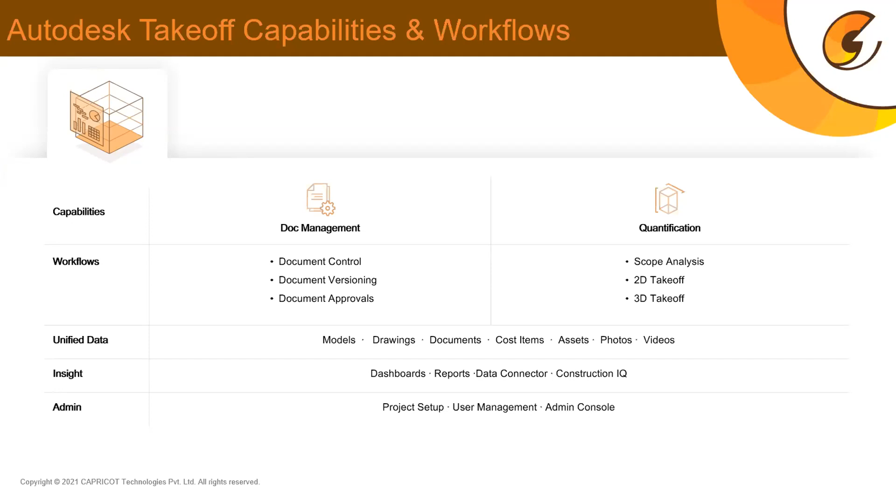When we talk about Autodesk Construction Cloud, the first thing is that it's not software we need on our systems. We can easily browse it or log into it as we do for any products, for example our Netflix account or Gmail account. So when I play this video, we'll see how easy it is to jump onto Autodesk Construction Cloud, and we can access it from anywhere without needing our systems in front of us like we need for particular software.

We get this page, and like the login processes we do for any web logins, it is that simple. We have our login IDs and password. With that, when we just log in, we directly land into the Autodesk Construction Cloud platform.

We get here the list of all the projects that we have, and we can then select the project. As you can see, I have opened the project which is our demo project that we have been using in the Revit demonstration as well.

We discussed a lot of things here like document, Autodesk docs, takeoff. So it will be very confusing at the initial stage what these are. It's a navigation, very easy, quick navigation that can be done to switch onto the products that we want to go to.

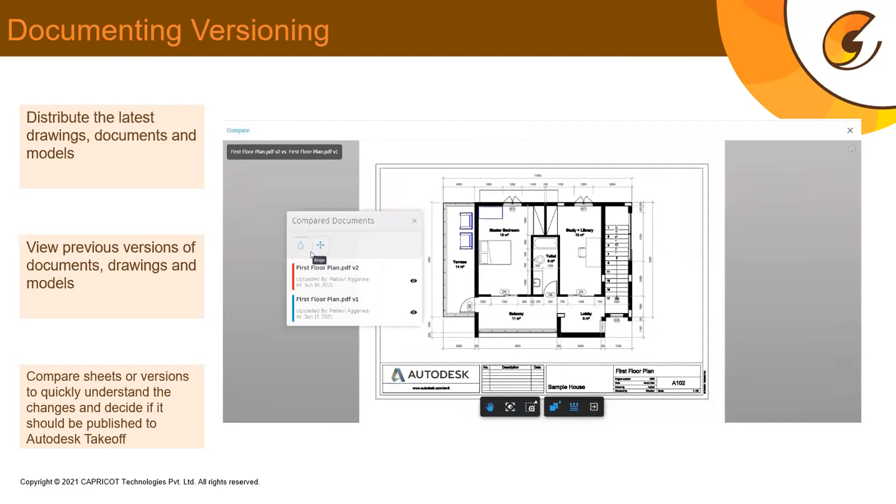So for that, we can also compare the two versions, what changes have happened in the drawings, what are the new additions or deletions that have happened, with the help of a color coded process. So here we can check onto the views that we want to see, what are the recent changes made in the recent files. And we can compare this with any version of the file, from the current to any, like we have the 10th version update. So from the 10th to the first version, we can also refer to what all changes have happened. And for this, we do not need to refer to the plans again and again, and we are not going to ask the architects for the difference. So that makes the visibility, the comprehension of the drawings very easy.

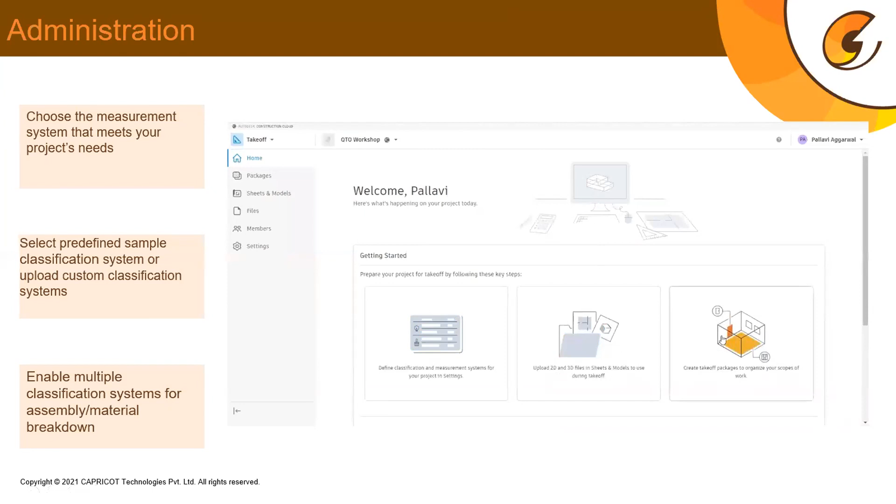Now, when we talk specifically about takeoff, we'll see before starting with takeoff, we need to set a few administrative activities. We will have to set what measurement system we are taking and what classification system we are going to perform in the project. This will again help in doing the standardized way of working. We have 3 initial steps that we need to perform: the classification, then adding the sheets, and then creating the packages. Creating packages is like work packages. We'll see in the coming presentation.

So now as I selected the metric template here, I want to work in metric, and I have my own set of classification system, coded system that is there with me in my organization we work on. So we download the initial template, we add our template information in that template, and we re-upload it in the system. So this is a very small generic classification system that we have prepared for the understanding of today's workshop. And then now when the classification is done, our first set of information to start with the takeoff is done.

Now, when we talk about content and documentation, you have added drawings and you need to manage the content in the files. So how do we do that? As you can see, these are the files, those are here, and there are many files in the folders. So we need to filter these drawings, we need to filter which package we are working on. We need to select. For example, I'm working on a civil package. I need to quantify masonry work and the concrete work in the drawings.

So there are a lot of drawings in the folder that we have uploaded. So we can filter those files from the folder with the help of this filter option with the different types we have available. We can also bookmark the files on top. For example, some drawings are needed by the civil package only, and some drawings are needed for the finishes package only, and these are the files that we very frequently refer to. So those files, we can bookmark with the help of this bookmark option.

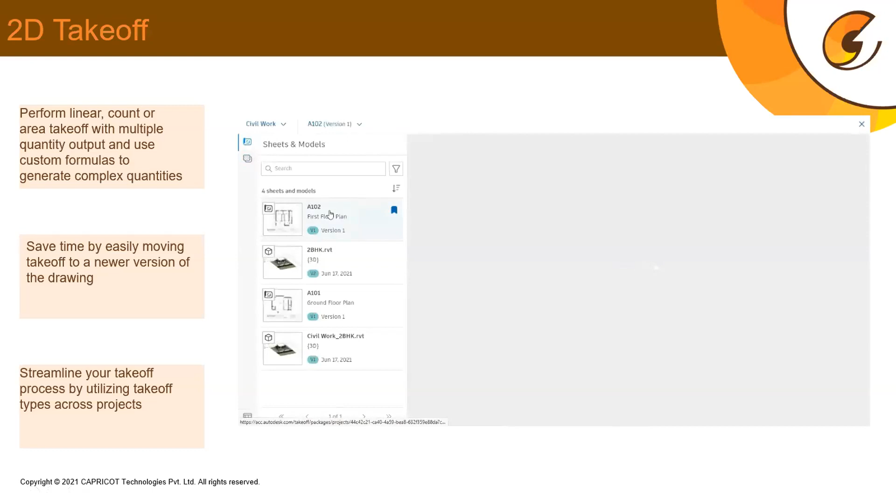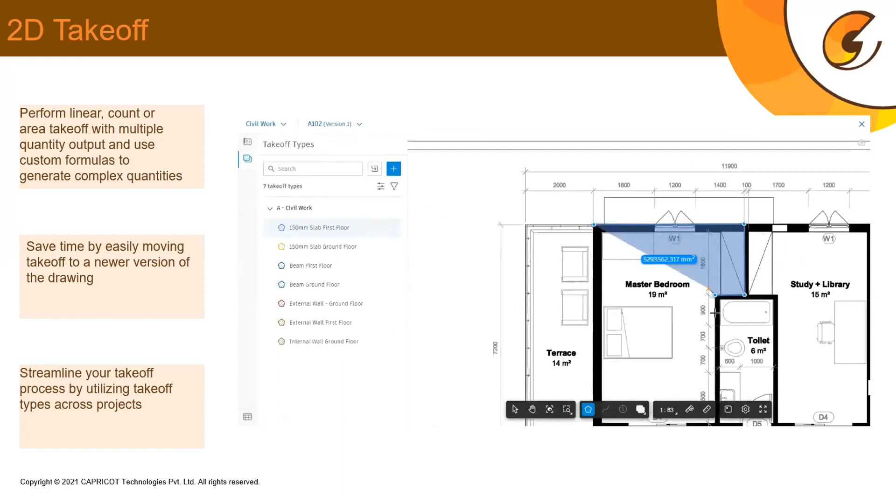Here, for example, I've selected the first floor plan and opened that plan. So when I open this plan and want to quantify, I will select the takeoff type I want to work with, the one we created for the slab. We'll select the area we want to quantify, and you can see how simple it is. Even if we are not working correctly and want to change these points, it's easy to calculate. And simultaneously, you can see in this blue box that the area is also being given.

When you go on details, you can check the total meter cube, as we added the formula here of 250 depth, which is the thickness of the slab. So it is that easy. Also, when we work with quantities like slabs, we also quantify the number of slabs there are. So we can add in a single takeoff type maybe 10 slabs on a single floor, which gives us the count as well as the total volume. So it is that easy.

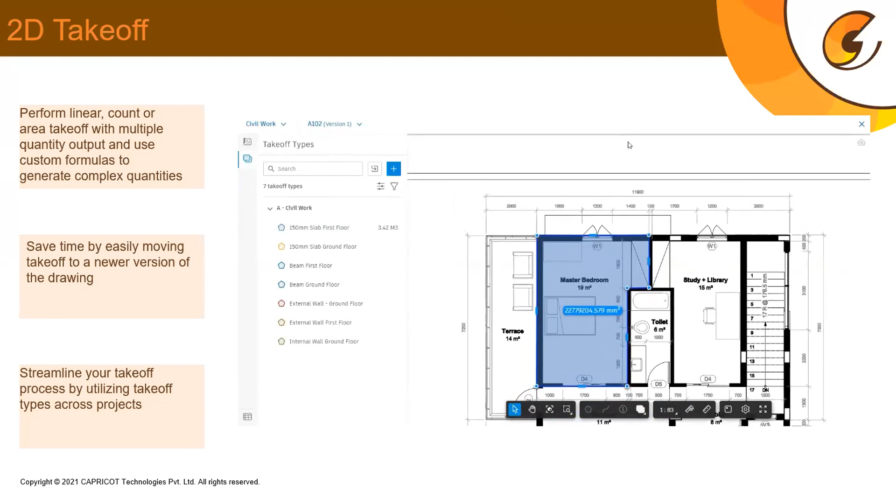In 3D takeoffs, it is much easier for us to work. We can easily understand which object we want to quantify, where they are located, even the placements of those components in the project, how they are working, and whether we are missing anything. So those can also be done.

So now, for example, the first step is to select the package we want to work with. We jump onto that package, and from here we have uploaded the 3D model. We do not need Revit for this; we have uploaded a Revit model in this RVT file into Autodesk Takeoff. You can see the same model that you were able to see in Revit in the previous demonstrations.

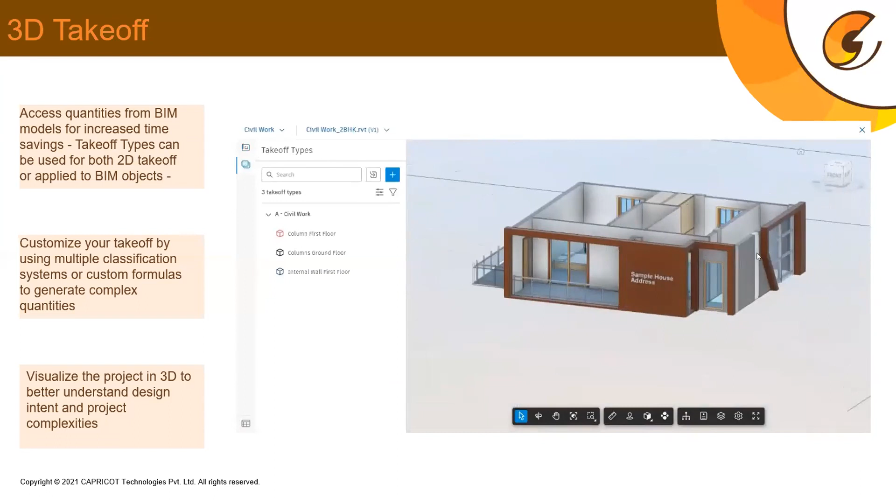Now when we want to quantify the columns for the first floor, with very few clicks I'm able to isolate my first floor area and select the columns I want to quantify. With the help of visualization, we can very clearly identify where the columns are, and even if there are any errors in the drawings, we can identify them.

Now, with a single click and the quantity type I want to work with, the columns are being quantified, we get the volume, and the drawing is being color coded, so the model is color coded. We know that they have been quantified in the model, and we can now get the detailed information that we require.

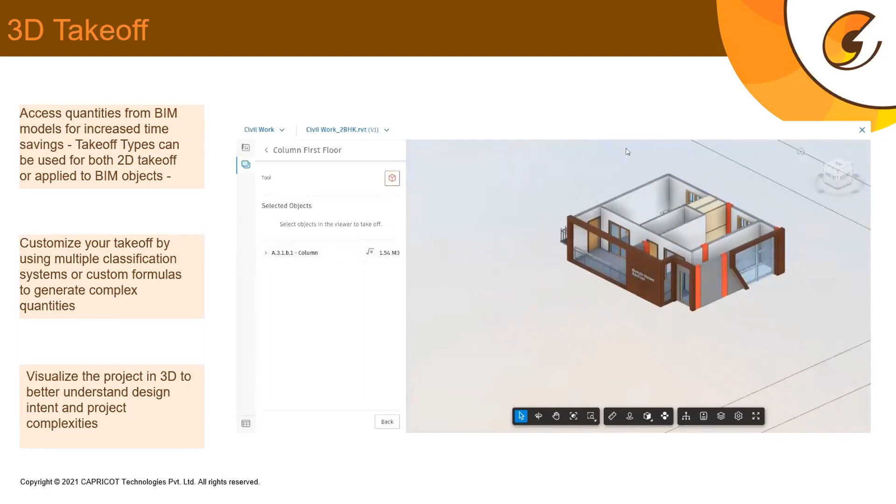When we talk about aggregated 2D and 3D quantities, we understand that we have worked on two separate sets of files - a 2D file and the model. So when we need to view those quantities that we have taken out in a single environment, that's what all things we did in the single package, like a civil package or the finishes package. How easy it is to navigate between the summaries, how we can adjust the columns, and how the line items can be checked in the inventory here.

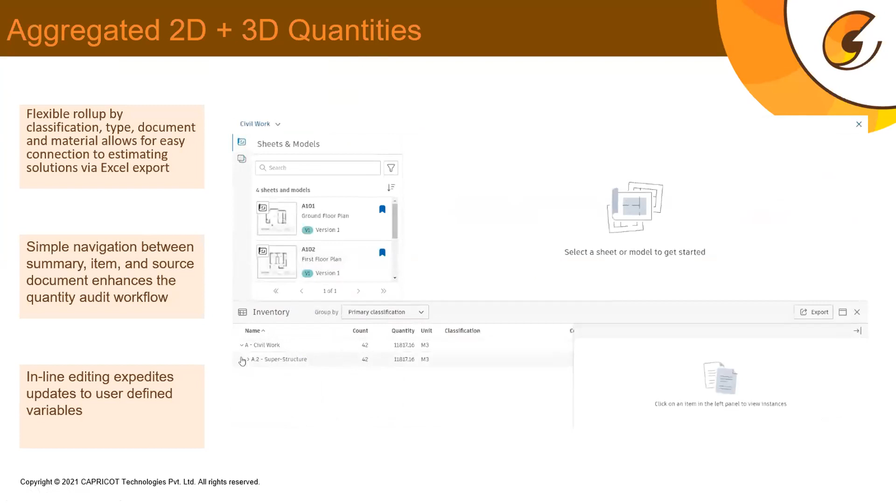So again, we will select the package for which we want to check the inventory. Down below, we have this inventory box, and when we select, we see all the items that we have quantified, both in the 2D and 3D environment, and it gives us the total count and total quantity. Because we have made this classification system in hierarchy and levels, the information is also given in levels and hierarchies, and this breakdown gives us a more detailed set of information.

Now, for example, all the quantities we have quantified on the right-hand side, I am able to select each individual quantity that I have done. Now I wanted to select one particular column and view where it is in the model, whether I have selected the right column, because sometimes there are different shapes or dimensions of the column. So if I want to switch it from one quantity takeoff type to another, now you can see I've gone to the ground floor slab calculations from the single space. So the shifting from 2D and 3D and the comprehensiveness of the platform is so easy.

We can also export these files. We can also arrange the columns, the information that we need, and look for the option that we want. We can rearrange these columns for the level of information we want, so that becomes very easy. Now, for example, I have changed the group type by document, so all the documents from where the civil work has been quantified will be shown here.

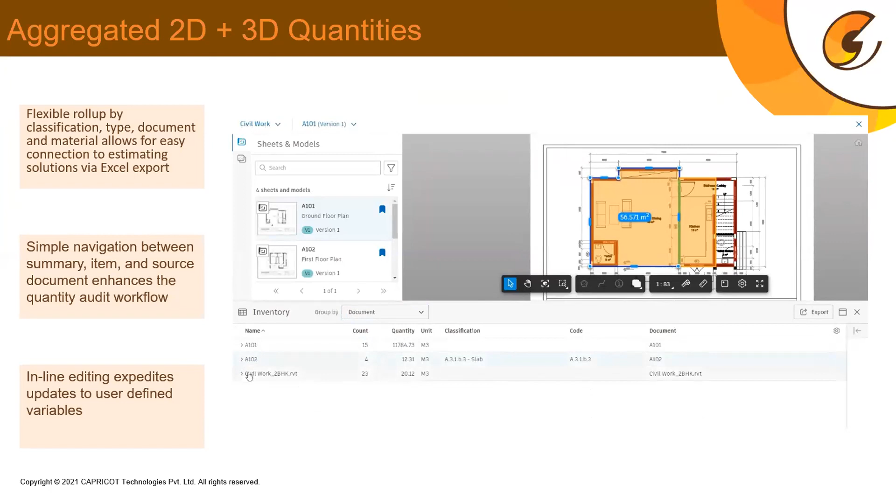And that too in the bifurcated manner in which we have created our classification system, so to comprehend the information - what the classification is, what document I have taken the quantity from, what the volume is, what the unit is, total count - all these things can be done. Similarly, if I want to understand from each file what quantities I have taken off in the Excel file, that can also be done again by changing the group type and exporting the files.

So due to the shortage of time and the complexity of the process that we wanted to show here, I'd like to sum up with the takeoff solution we just discussed. Again, we saw how our documents can be managed in the Docs solution that is there. All our files can be uploaded, shared with our project members. We can review those files, we can assign those files for working, and we can manage our users in the platform - adding information, roles and responsibilities.